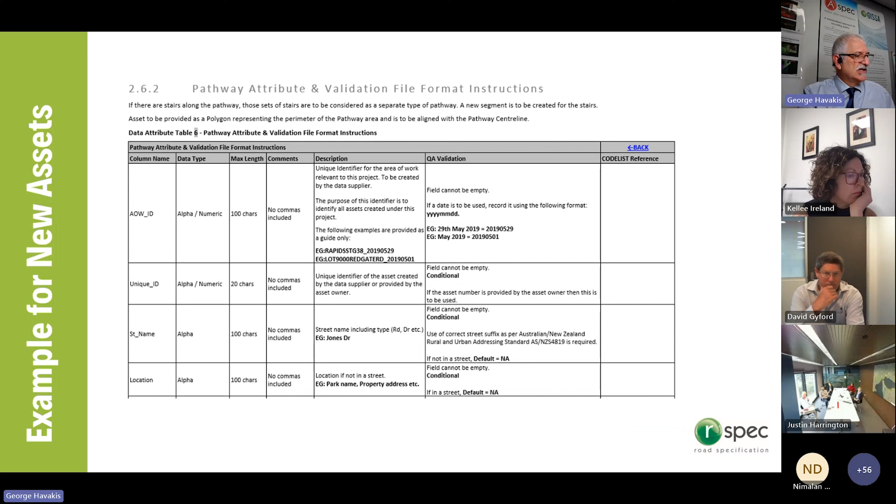Now they are identical except for one aspect, which I'll show you. If we look at the pathway table, you can see all of those attributes there, which you'll be familiar with if you've used R-Spec before. The only difference between this version for new assets and the version for existing assets is that we've looked at each asset attribute and categorized it according to whether it's a core requirement, an optional requirement, or a desired requirement, which is the YR. On this page, every attribute has a classification, and we use the optional and core requirements here just to give you an indication. It's really exactly the same - it's a mirror version.

What we've done is had a look at what is practical from a field perspective - what are the things you can literally physically see when you're out in the field. When it comes to a YR requirement, required and may need more research, what we're saying is that you may not find any further detail, which is okay, in which case you use a default value. But in the event that you want to rummage through your historical plans, or do some verification out in the field, we've identified which attributes would be classified as YR.

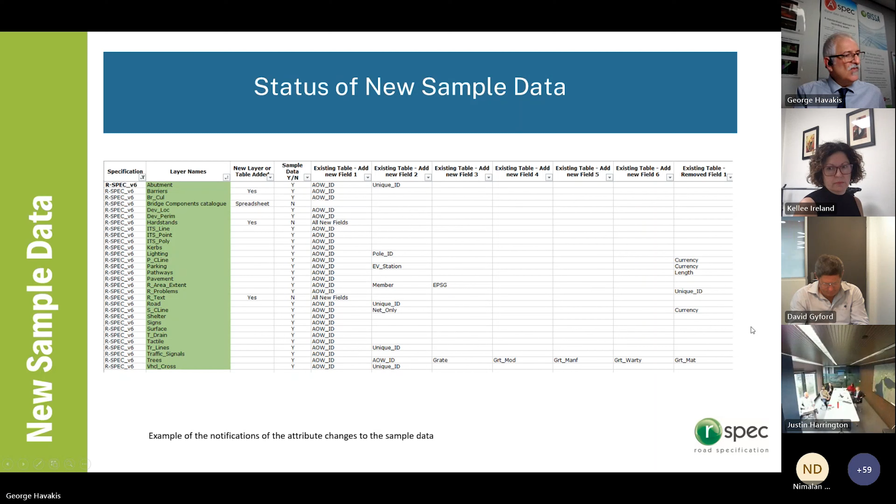Aside from that, we've looked at a couple of initiatives that are going around. One is VBIS, Virtual Building Information System, and the other is Uniclass. VBIS is a Victorian initiative that has been developed to assist the identification of assets from a built environment perspective for organizations that want to get their assets into their asset system. The intention of this is to standardize the coding of different kinds of assets.

How this fits in with R-Spec in particular, and A-SPEC overall, is that both VBIS and Uniclass are classification systems, and Uniclass is an ISO standard. Uniclass 2015 is ISO certified, a globally recognized standard, and it's also been recommended in the Victorian Digital Asset Strategy that for all the large builds occurring in Victoria, they utilize Uniclass as part of their classification system to create interoperability, which is fine.

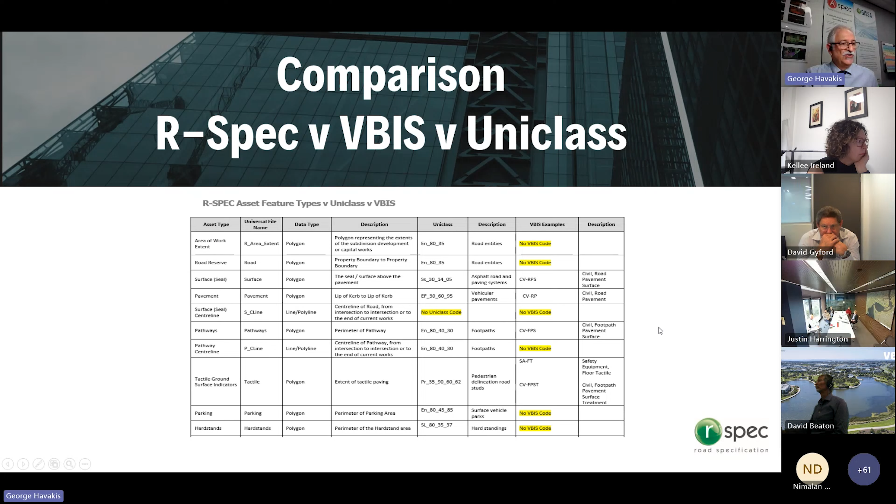Due to the level of maturity, and I'm talking about the increase in maturity and sophistication at the asset owner level, we're now getting a lot more queries around the specs, not just R-Spec but across the board, which is really pleasing because it gives us an opportunity to see how appropriate the specifications are. So this next group of slides is all about answering queries that came in from the community.

So I'll start with this one: which assets do I capture? I'll talk more about this under our governance section, but you may remember, if you've been at previous forums, that we've presented a checklist this year and also last year. So here's a snapshot of this.

What we suggest is that you start by looking at the checklist. When I say strong recommendation, if you really want to be clear about what is to be delivered and what you're going to receive, I can't stress strongly enough the importance of doing some kind of checklist. So we've prepared a checklist, and I'll give you more detail into this in the governance area.

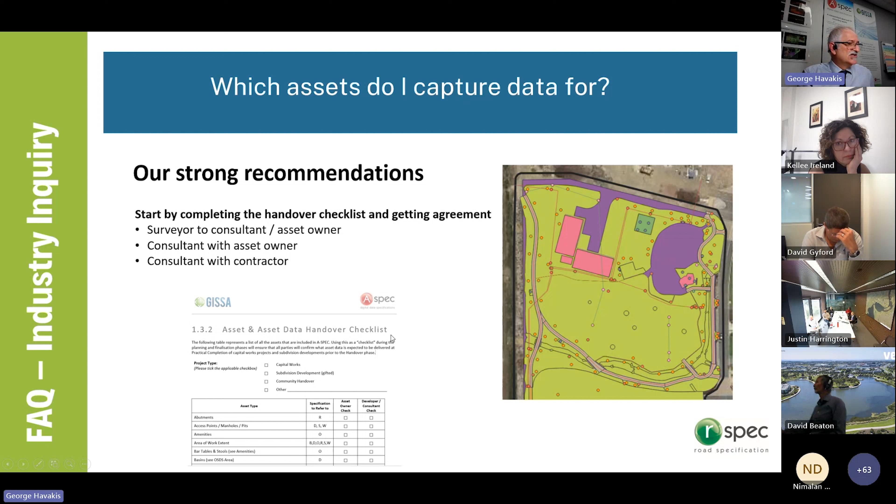I showed this last week, but this is really critical because of the impact of how R-Spec features will fit into an A-SPEC environment. I wanted to show this particularly for people who haven't attended any forums before, so I want to discuss with you the question.

The question is, we have a new feature in R-Spec called hard stand. So what is the difference between a hard stand and hard landscaping? Fairly valid point. Up until this version, we haven't had hard stand, so everything related to some sort of solid feature like this has been captured as hard landscaping.

Now, in this instance, in this park environment, I'm interested in seeing what people think. So Kellee has put in a poll - do you think it's a hard stand or hard landscaping? I'll let you do that in the background and I'll keep talking about that.

A hard stand has been created to enable capture of areas that are used to store plant and equipment or heavy vehicles. Fundamentally, the construction is different and the attributes are different, and I want to show you that. So in this scenario, the answer to this question is this is hard landscaping because of where it sits.

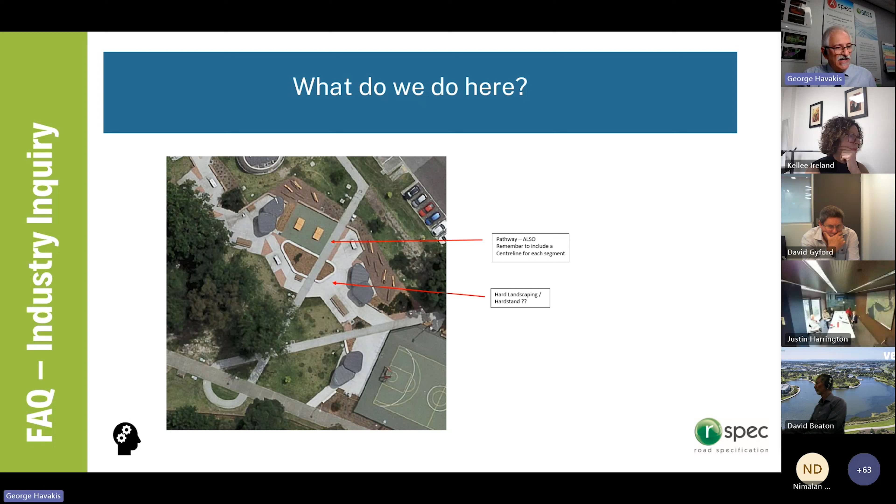However, if we move on to what is the difference between the attributes of hard landscaping and hard stand, if we have a look at these two tables, I've identified the common attributes in a pale blue grey colour, depending on the image on your screen. The colours will vary, but the highlighted ones are the common attributes.

As you can see, there's quite a few more attributes in the hard stand area that relate to the construction of the material of the hard stand, the weight bearing capacity of the hard stand, which is really important, whether it's been reinforced or not. Whereas in landscaping, there isn't that particular requirement, so there's far less attributes.

So if this was to be captured in the previous example as landscaping, you can see that you use this table on the right. If it was to be captured as hard stand, but you only captured it as landscaping, then you could see that there's a lot of features there that are really critical to the maintenance of that area that need to be captured.

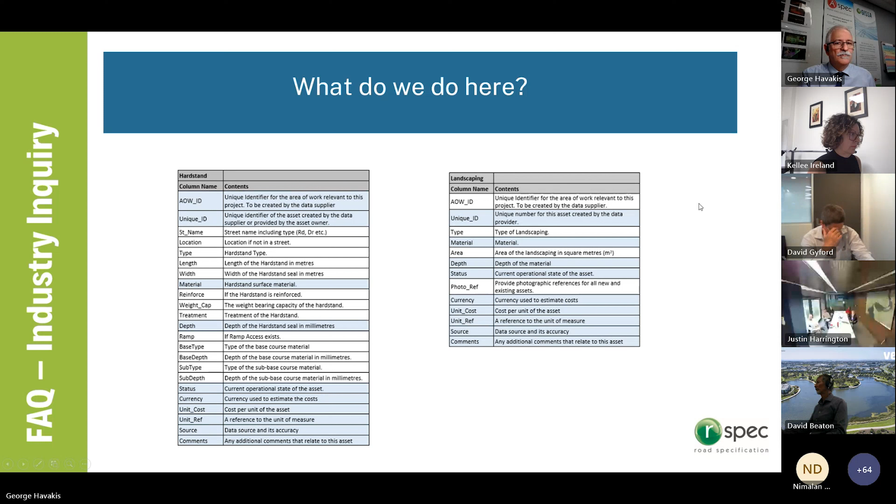Okay, so here's another example where we've been asked, so what do we do here? Do we do A or B? So the intention of pathways is that they are separated by segment for pram ramps or ramps.

Part of the reason behind this came about from an inquiry a few years ago by a councillor to their asset management area regarding the location of ramps, due to a customer complaint. They had a complaint where people found it difficult to access one side of the street to the other, and I think it was dealing with a person that had a particular mobility issue.

So the importance here is that if the council wants to aggregate the polygons, that's okay - that's a council choice. What we're saying is A is the preferred and recommended approach, so that's what's specified in R-Spec. And then if B is required or requested by council, then it's a conversation that you need to deal with.

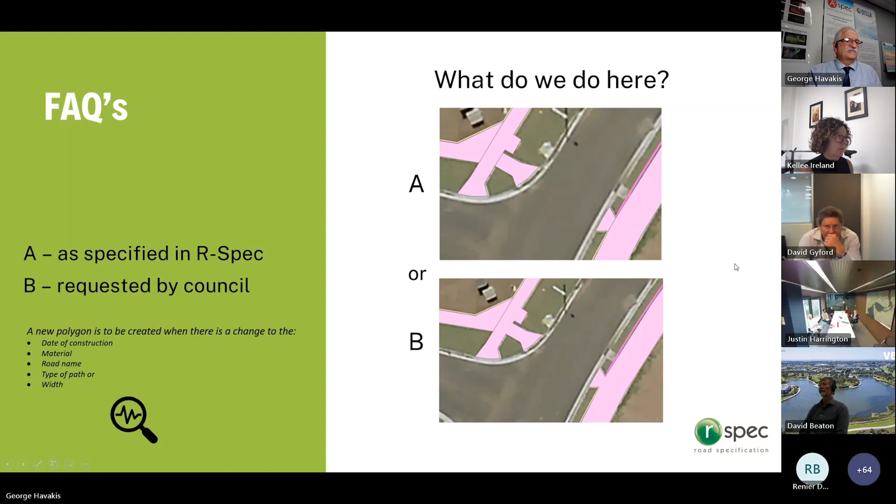So, in my experience, segmenting pathways are often linked to roads historically, so the roads have a parent-child relationship and generally viewed from a database perspective. So I hear two schools of thought: need to align to a road so we can find them, that's one school of thought. Another school of thought is, as long as it's recorded, we can find its location through the GIS. That's okay, we have no fixed view. What we've provided in the documents is some guidance around the segmentation.

So you can see again with these footpaths, these pathways, we've segmented out this ramp area, and then there are 1, 2, 3, 4 segments along here. Now, initially we did this to reflect where the ownership of these pathways are, but at the end of the day, it's something that we haven't standardized, because every organization wants their segmentation to reflect their asset management environment and their maintenance environment. So the main objective from an A-SPEC perspective is to get the data to the door, so that you can deal with the data the way that you need to deal with it within your own environment. That's the intention.

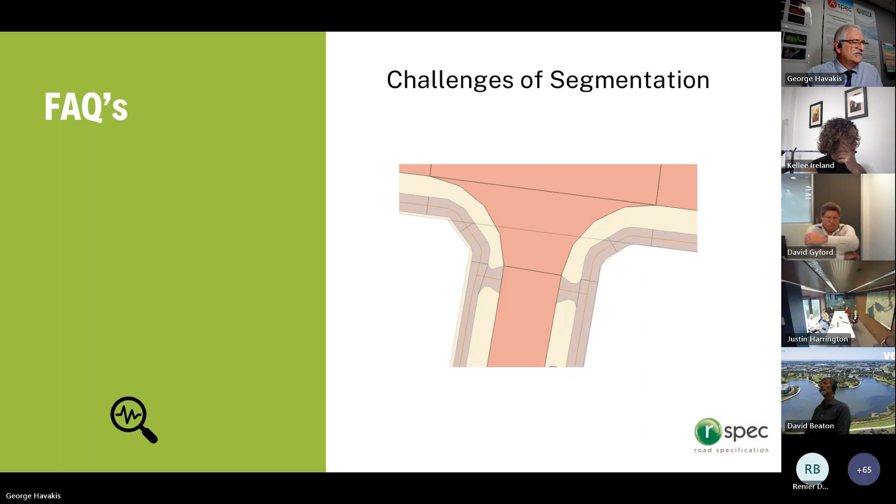There's also the question of how much you need to do - this applies to roads too. There's joint responsibility here, and I can see both sides of the fence. On one side, the asset owner saves time, and it's completely valid to have a requirement for segmentation to be done as they need it. As I've mentioned, I'm yet to see more than one council do segmentation the same way.

There's a level of consistency that's important. Ultimately it's up to the consultant whether they take on the request and whether they charge for it. Going back to John's question earlier about requests from councils, our position is that some post-processing can be done - no problem, as long as we're consistent with what the data is meant to deliver. That's the intention of the specs, and by following the specs, everybody knows what to expect.

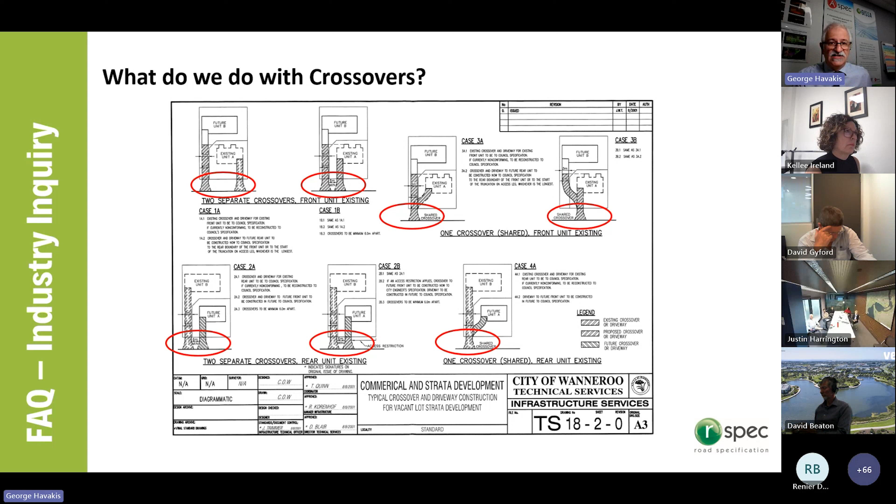So what we look at is: is this a council asset? Typically in my experience it's not, even though the council provides authority for how these driveways are built and maintained. So the focus, shown in the R-Spec example in the bottom diagram, is the pale blue driveways - separate from the road seal, which is a council asset.

In these instances, using the diagram we acquired from City of Wanneroo where we've identified the driveways, the extent of the polygon would stop between the back of the curb and the edge of the footpath, and typically there are no attributes associated with them.

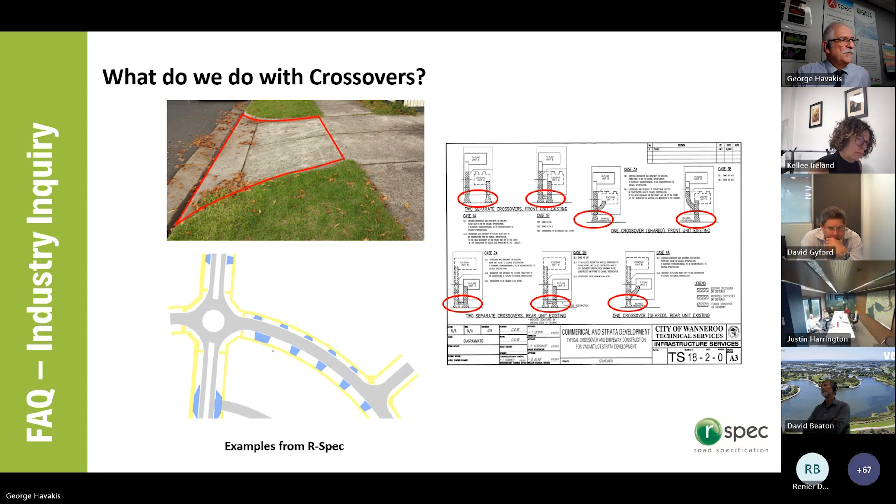We've been getting a lot of inquiries about the technical breakdown of assets, which I think is great because it shows the maturity level is increasing, and also the importance of the data for asset management decisions.

Now this one is around roundabouts and splitter islands. There are two questions here. Roundabouts have a requirement for diameter, so how do we capture it? In this instance, as the infill is landscaped, it would be recorded as landscape, and a landscape polygon would also be captured.

So the splitter island and pathway pavements - let me go back a step. The diameter captured should be the overall diameter of the roundabout. But because there are two kinds of assets there - the infill as well as the overall roundabout - both need to be captured. That's what's specified in R-Spec, if you look at figure 90 in the updated specification.

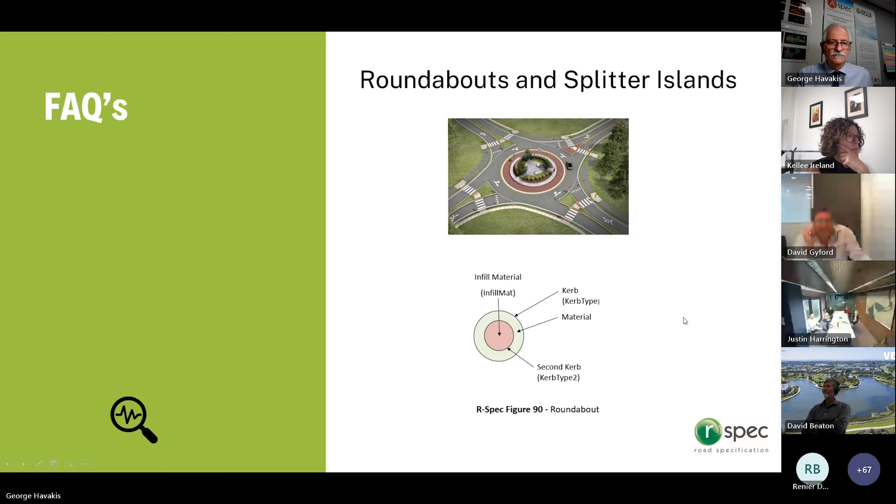And if we look at roundabouts and splitter islands - what do we do in this instance? We've got underlying pavement, we've got a pathway. There are also comments in the chat from John about council-requested concrete and exposed aggregate being shown as one polygon, and agreeing that there's a lot of variation between councils - that's difficult to predict and ultimately results in unhappy clients.

Happy to keep a style guide for each council, but I'd like councils to provide example data, ideally linked to their standard engineering drawings.

That's great feedback from both John and Jess, and I can see Shane is also discovering it - it's obviously a common thing going on. The first thing I would do is start a conversation. If your client is the council directly, start a conversation with them, particularly with the asset management area.

If you're a surveyor and your client is the consulting engineering company or developer, have them have that conversation, or have them authorize you to have it. It is difficult because there are so many variations. I'd love for us to have a standardized way of segmenting things, but we're not there yet.

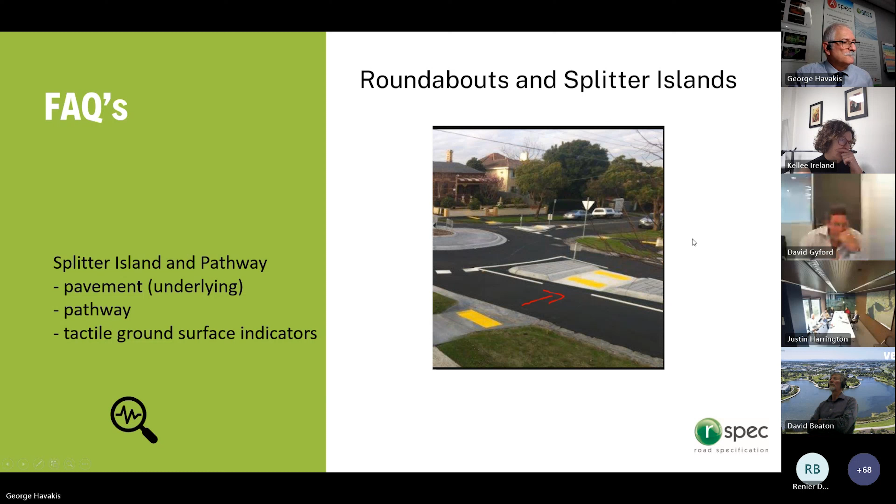Okay, just moving away from diagrams for a moment - conditional fields. There are conditional fields throughout R-Spec and throughout all of the documents, and these are becoming more common. Essentially, it's an if statement: if this situation exists, then do this.

As you can see with the unique ID, if the asset number is provided by the asset owner, then this is to be used. In some instances, it will lead to a default value, such as these two fields, street name and location, and they are connected. So it's either one or the other - that's what the condition is. If not in a street, then use the default. If in a street, then use the default for location.

So it's important when populating this level of detail that it's not something that needs to be verified out in the field, but it can be done back in the office as you're processing your data. So the conditional statement is quite common.

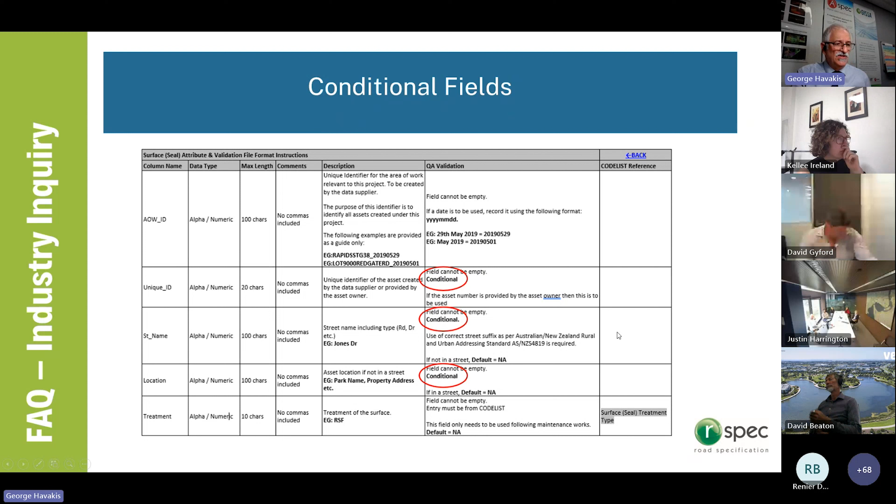So there's two - this is the last frequently asked question. Sorry, there's two last frequently asked questions. This is the first one: I've not been provided with some details - what do I do? Do I make assumptions, just use my defaults, or leave blank and hope it's not noticed? Well, the actual answer to that is none of the above.

It's important, and we stipulate this whenever we're talking to consultants, that you chase up with the lead consultant and request they provide the details. And I know it's easier said than done. However, the alternative is to provide defaults, knowing that the consultant, knowing that the council or asset owner reviewing it will say, well, hang on, you can't put the defaults in there, or you can't leave it blank because it's a brand new asset - so everything about that asset is known. So it will be incumbent upon whoever's doing this data collation to chase up with the lead consultant or the contractor to get the information they need.

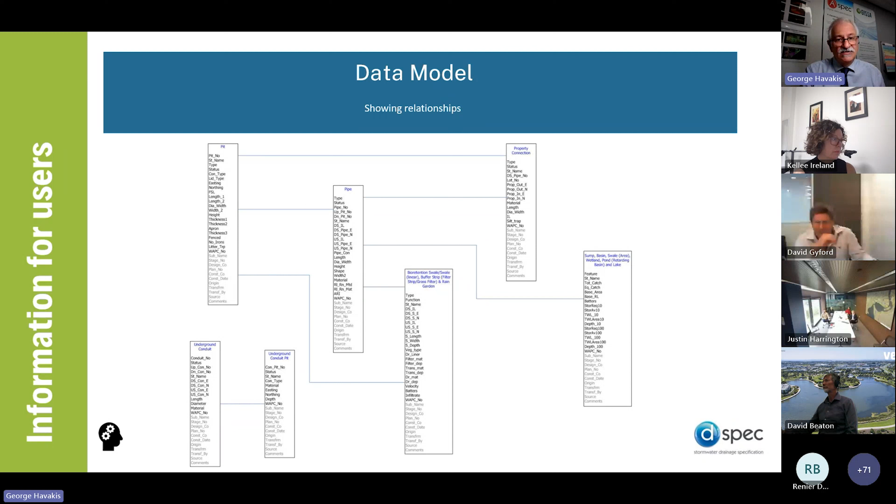Now, governance. How do I record a C comment? From the data provider end, the C comment enables the data provider to submit their tables when features don't currently exist. No problem, that enables them to get through that validation area. When received by an asset owner, we request that we are contacted so that we know of any new features that are emerging that we need to create new codes or new features for.

So we're not suggesting you use C comment, not at all. What we're suggesting is that the C comment identifies that there's something outside of the current code lists or outside of the features that are captured. And as soon as we're notified, then we can deal with it.

So the asset and asset data handover checklist, I talked about this earlier. This is available on the A-Spec website, and you can access this. I don't think I put any login requirements for this, so you can log in and download it there. But the importance of this is that there's a part to sign off on from both parties, so that way it gives you something to deal with, and something around certainty around what you're going to receive.

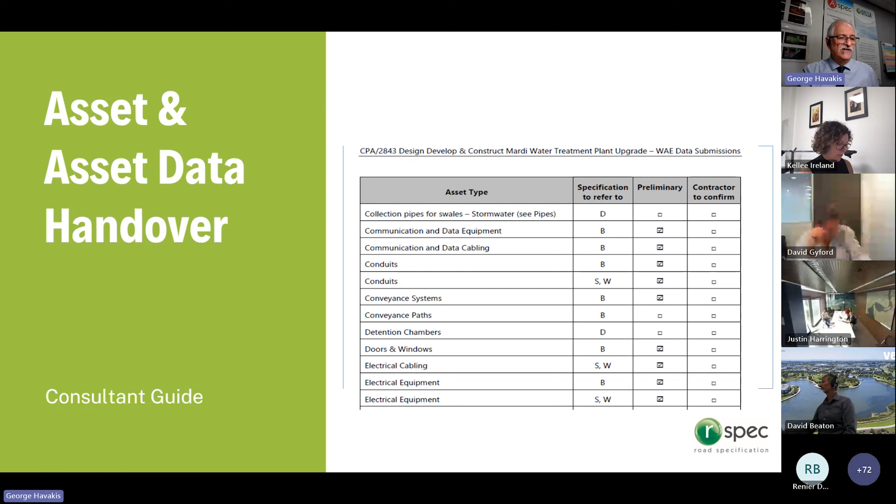The quality report is really important. Essentially we're looking at creating confidence and certainty and removing the time and effort to verify what's changed. This is built into the specs, as are the asset recording principles, about recording the detail, recording the assets based on a particular precision. Each asset type in each spec has a horizontal precision code and a vertical precision code, and these are guides to say here's what is expected to be delivered, here's what's expected to be done to capture the data that is to be delivered to the asset owner.

The certification form's been modified. I'm only bringing this up because we've included a start date of observation and end date of observation. And for the experts in this meeting, they'll know that this relates to the Australian Terrestrial Reference Frame that needs a start date and end date to determine what the variation will be.

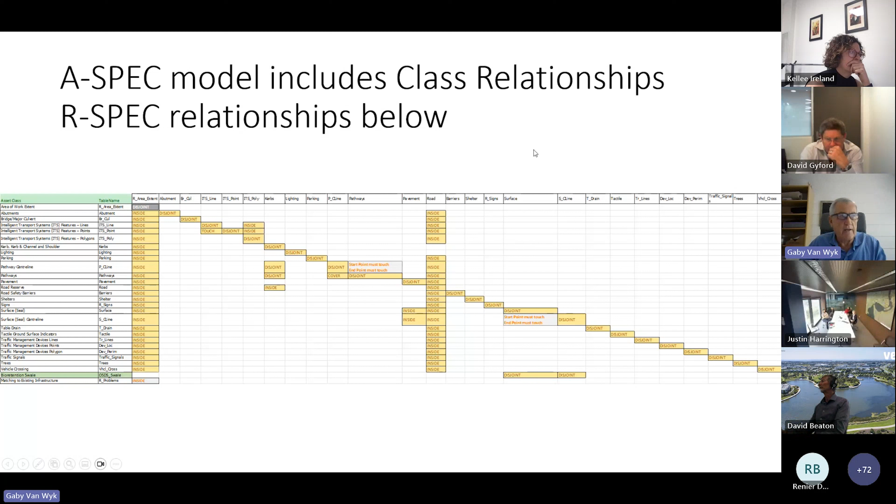These relationships that I've got here are the spatial relationships between different components or classes within R-Spec. I'm not going to go into the details of those, but what I want to talk about today is some ideas of how you test for those, because each of these should be tested, and both council and consultants should consider adding tests for each of these relationships within their process.

One of the first ones I'd like to draw your attention to is attribute relationships. There are two types of attribute relationships, and these are all embedded in the documents, and the relationships George was talking about earlier will highlight these sorts of things. One type is a one-to-many relationship, and the other is a one-to-one relationship.

What I'm sharing here today is just one of the ways. There are different ways, but this is one of the ways in which you can test using SQL in a product like QGIS, using SQL to test for those kinds of relationships.

The two that I'm going to be talking about: a surface's unique ID has to be captured in the parking seal ID, and that's a one-to-many relationship. But then the pathway unique ID and the pathway centerline path ID, that's a one-to-one relationship. And the same with the surface and the surface centerline.

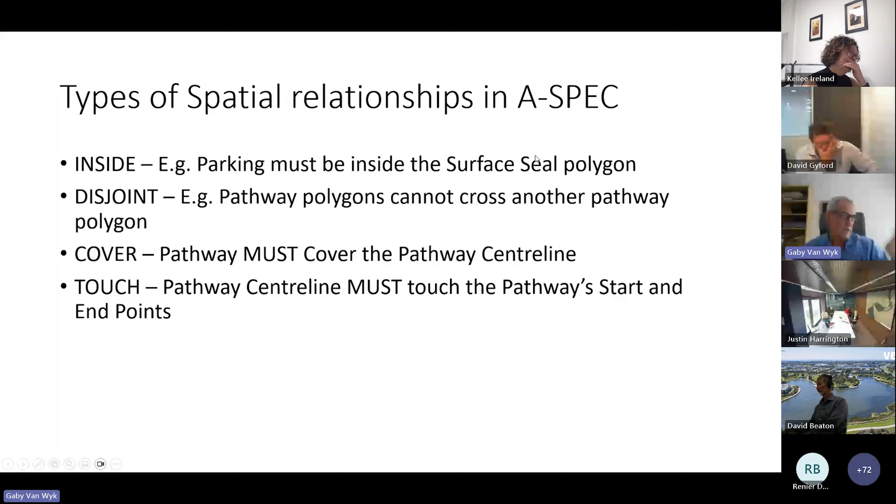So what I'm going to do today is play a little screen capture video for each of these and talk through that. The first example is to find all the records where the seal ID is not the same as the unique ID of the surface seal within which it is located. I've written out the SQL statement over here.

You can go and look at the recording, and if you take that as a principle and apply it, you'll easily be able to apply it to some other relationships like that. So here, playing my little video, and you're just going to zoom to the surface now.

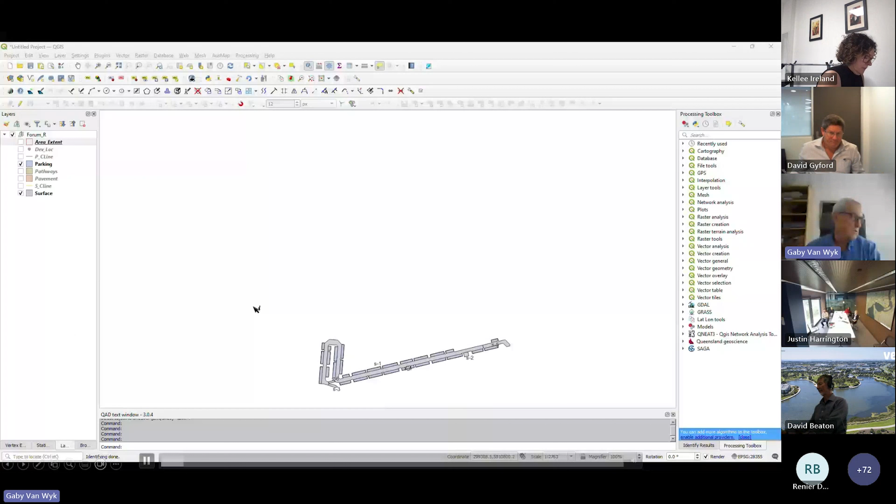So this is an example. I've got parking and I've got surfaces, and I want to look at the relationship between the two. What I have to start off with is just make sure, and this is just something that I always say, that I work in a geo package, and that I always know which geo package I work in.

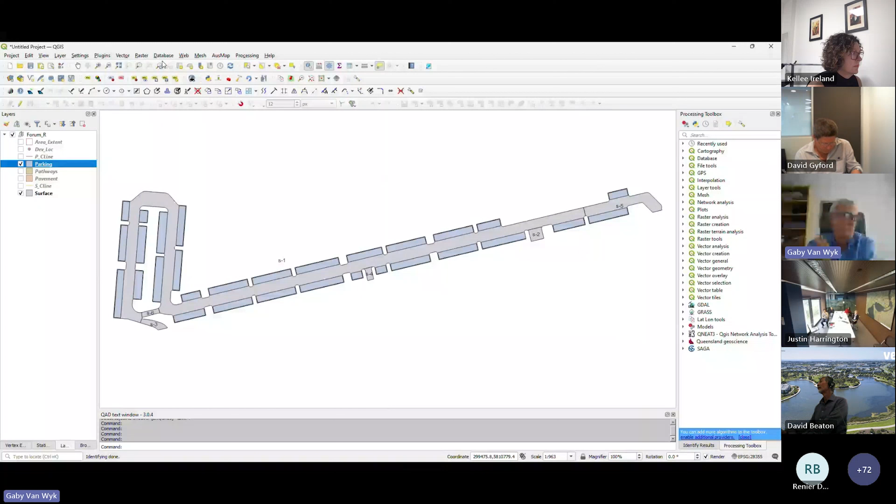Then I go into the database manager and open that geo package, making sure again that it's the same one, not something different. And then go and open the SQL window within that.

Now I've stored the SQL statement that I want us to work with, so I've just loaded that and executed it. And there it is—it's telling me that there's only one record, one of those records where it's not the same.

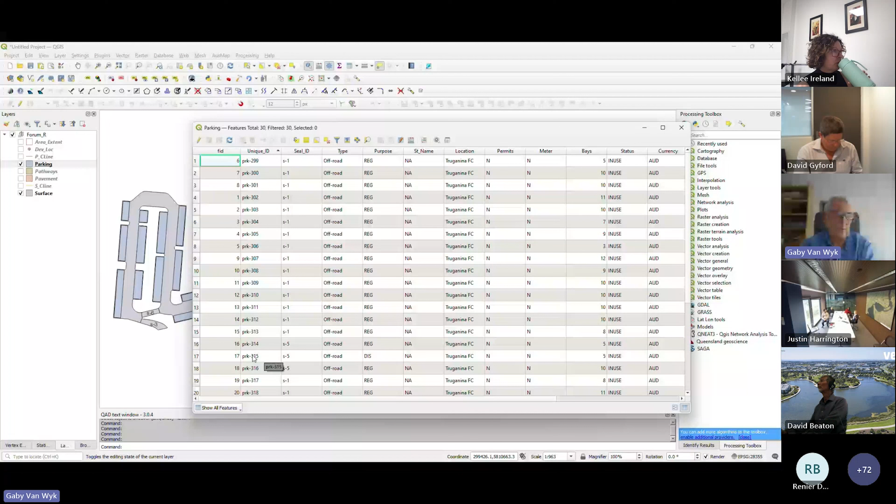So I can now go and find that record. Again, there's different ways in which you can find it. I'll just sort by the seal ID, or the unique ID I mean. I've looked at what that record is, the number, zoomed to it, and the system zooms to the record. If I query the seal, I see the seal ID is S1, and if I query that parking area, then I'll see that's actually captured as S5.

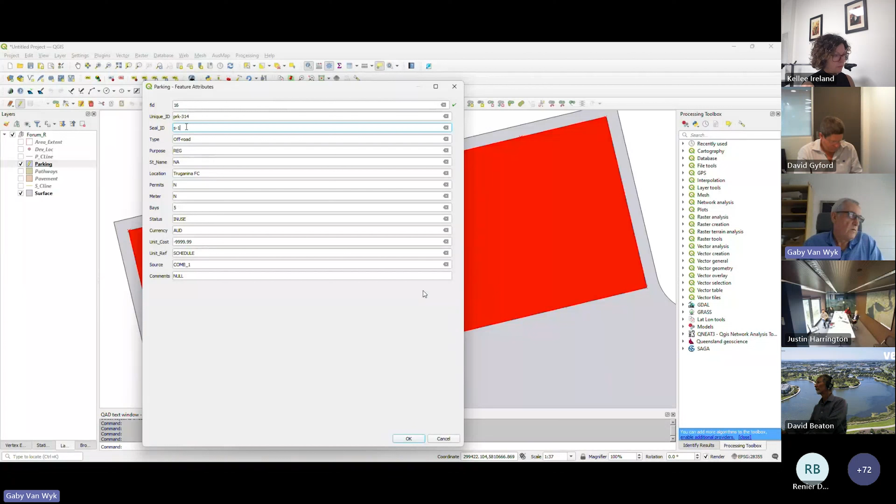And I can go and clean that up, fix it up—my video is too slow—save it and go back. I'll just advance a little bit.

So what I'm doing now is just rerunning the same test and seeing how I go. And this time I'm getting no results, which means that I've solved the problem. I'll just stop right there and draw your attention.

What I've done there is just remove that—in SQL, you have exclamation mark equals, which means not equal to. So I've just removed that exclamation mark and I'm going to run it again, and now I should get all the records. What I sometimes do is a count to make sure I've covered everything, and that there's no problems any further.

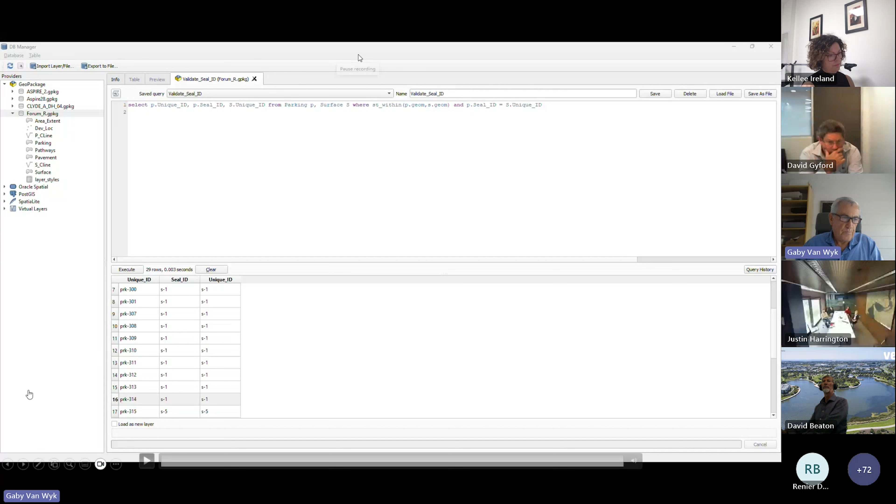And I think that's it for this slide. I'll move on to the next one.

In the next one, I want to find all the records where the seal ID is not the same as the unique ID of the surface seal within which it is located. The first one I talked about parkings and seals. This time I'm talking about the seal ID and the surface seal centerline.

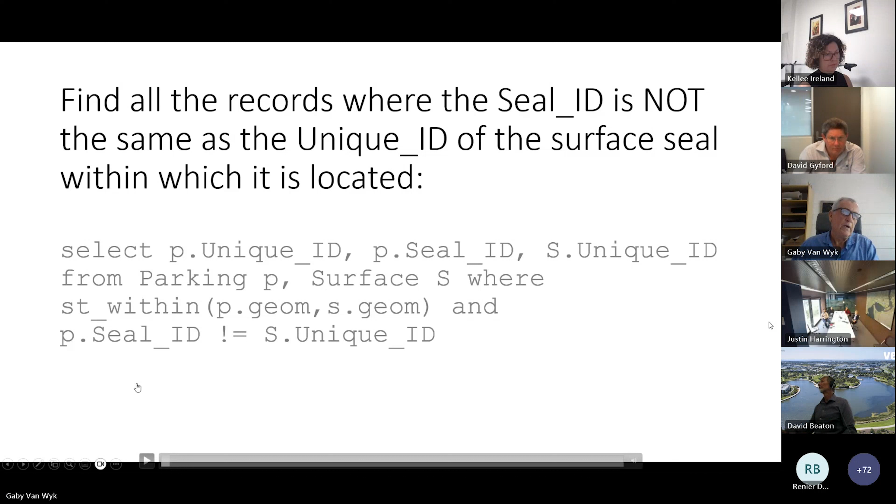Okay, let that run. Same sort of data set, and this time I'm just going to be working with different data. Sorry, I am still talking about the parking.

Am I playing the same video? Apologies, I am. How do I get to the next one? Just going to make sure I've got the right one.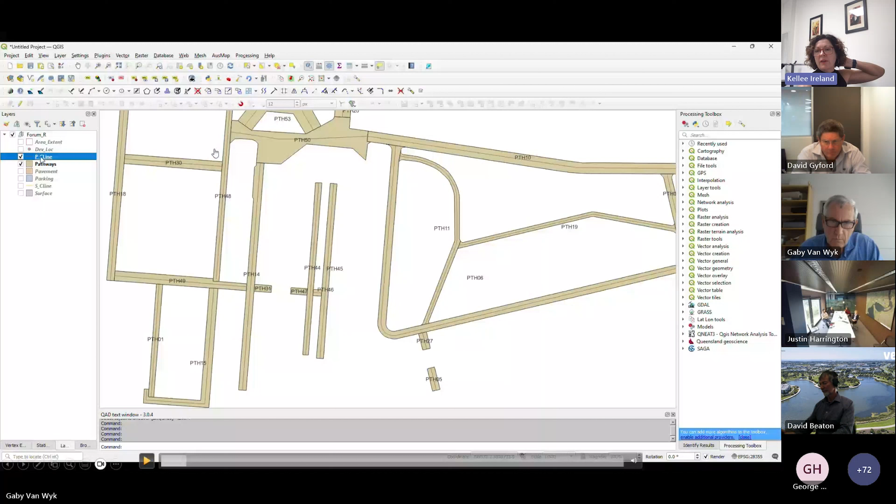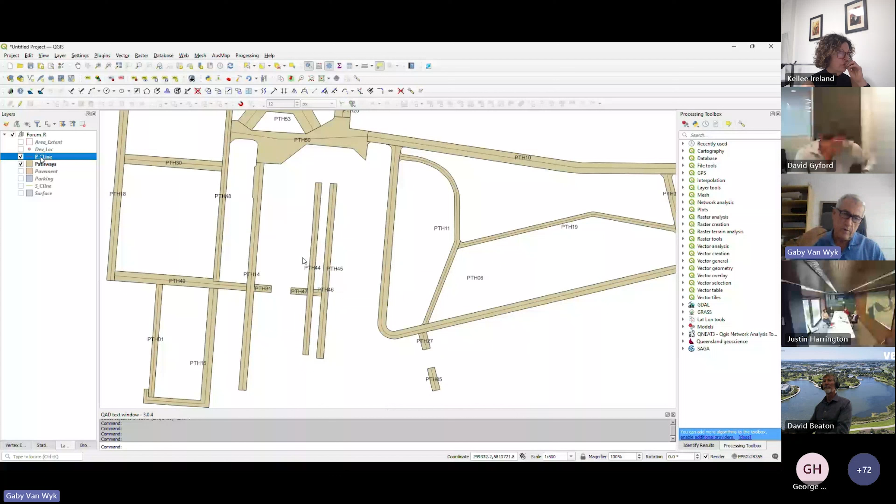In the pathway, the pathway ID or the unique ID of the pathway has to relate, according to the spec, to the surface center line path ID. So it's not the unique ID of the path, but the path ID which has to relate. It's got to be the same because it tells me that - that's the one-to-one relationship between the pathway and the pathway center line. So the pathway has a unique ID called the unique ID, but it has another field called path ID, and that path ID has to be the same as the pathway unique ID. So I hope I answered that question.

Okay, just running that little video again, having a look at the attributes. So there's the unique ID, that's the path ID, that's the stuff that I want to query.

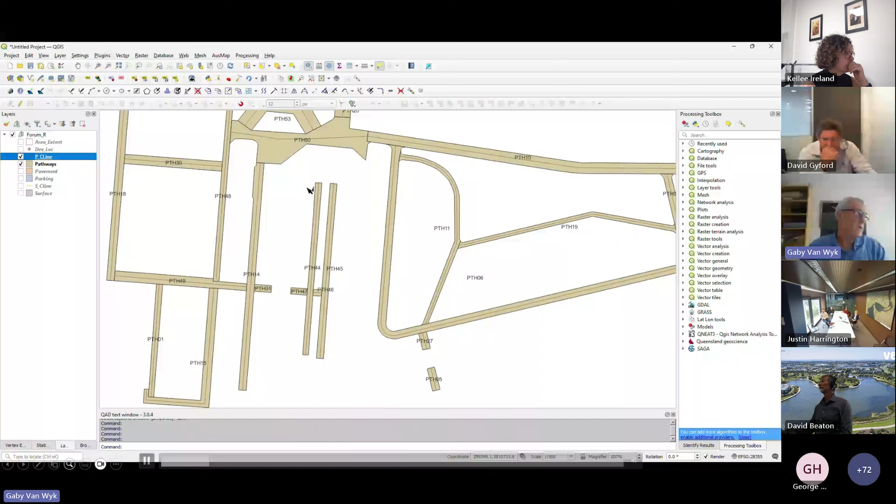So I go back to the database manager, again make sure that I'm using the correct data, and I'll just quickly load the pre-created SQL statements. I'll run that first one, and there's the results.

What this tells me is just a count. Let me pause and explain. What I'm doing here is counting the number of path IDs - how many times does a particular path ID occur? Because it should only occur once. If you look at record number 44, I find there's 2.

The second part of this query is just making it easier - I'm extracting, using a method that will help you extract just the one record that fails that little test. If you run it, you'll find there it is, it's the number. So for path 46, there's a count of 2, and I'm expecting to only have 1.

So now I can go back and find the record and fix it. It's going to load the attributes and look for that particular record, sort the path IDs. I could have searched for it, but I just thought it would be easier in here to show you.

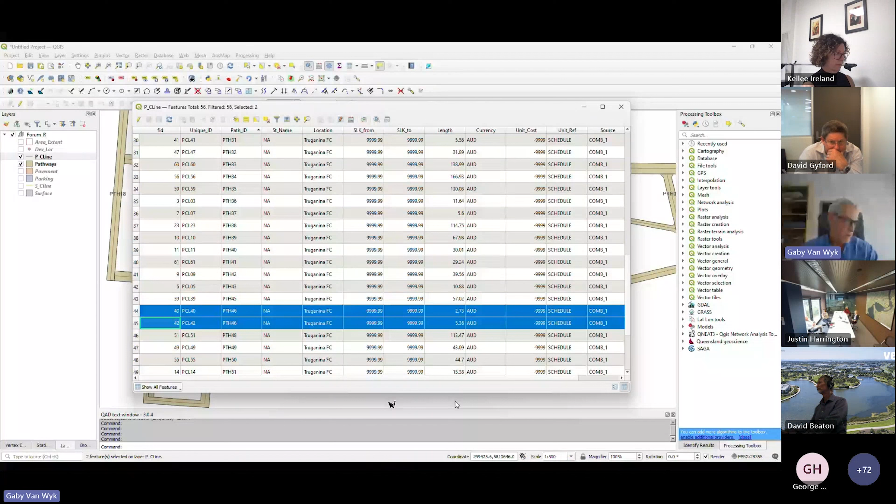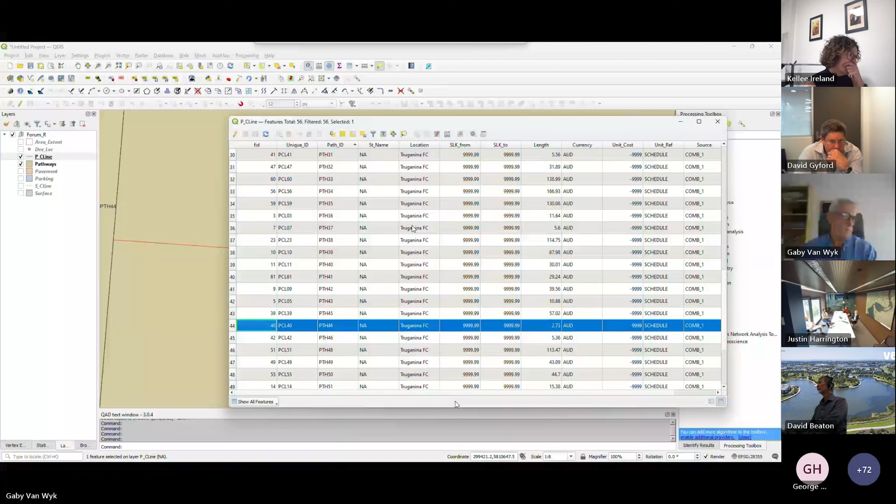There you can see rows 44 and 45 have got the same path ID. So let's zoom to those - that's the first one, and zoom to the next one. You can see that they're both next to each other. So when we captured this data...

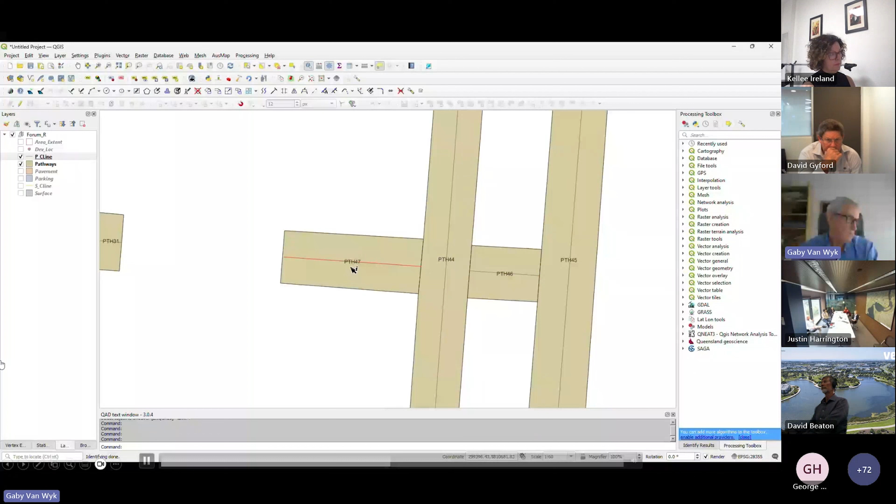The person that captured the data must have made a mistake. So if I query each of those - that one is, oh, by the way, I'll just pause here for a minute. The text that you see on the screen here, that text is actually just the ID of the pathway.

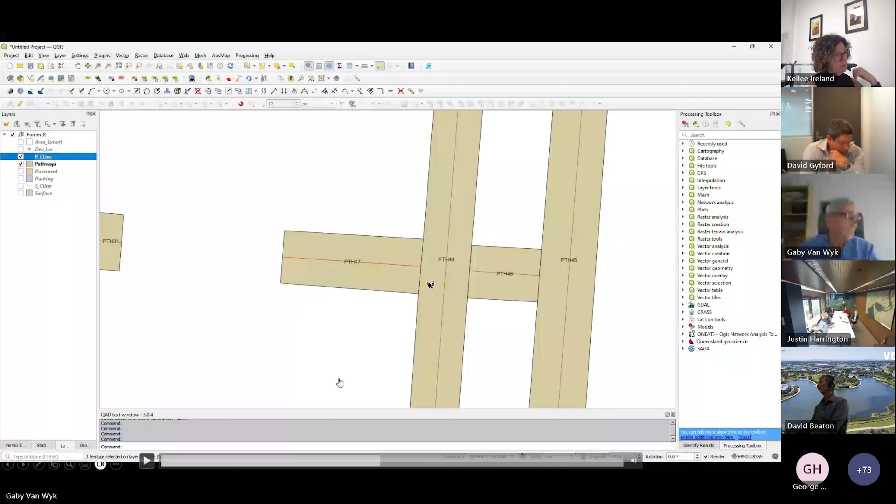So for pathway 47, each of those center lines should read the same as the text that's being displayed. So I'll just look at that one again - that one is right. Query the number 47, and that's pathway 46. So we know that that's incorrect, and that's what we need to go and fix.

So you don't need to talk about that.

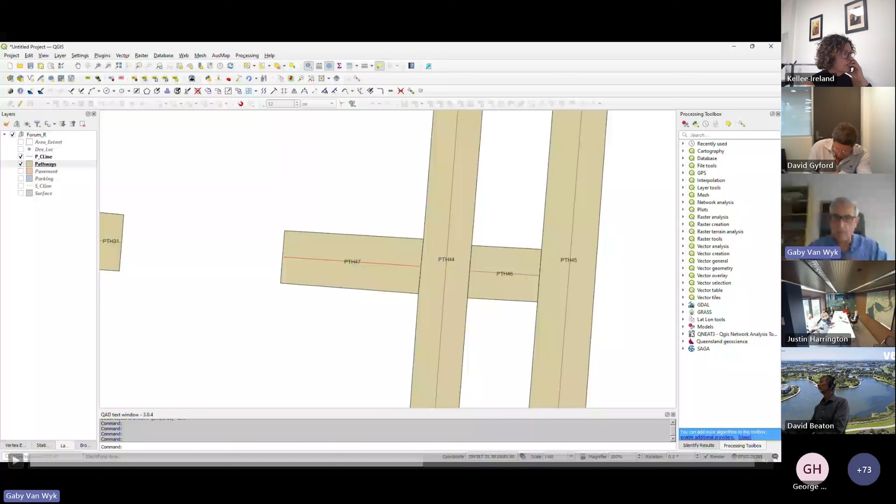So that's the first part of that test, and I did all of that using SQL, extracted and understood first how those different data sets have to relate to one another, and then found a method to automate that test. The automation is probably the key, because I can write that script once and then run it again every time I have another data set like that.

Looking at the second part, let's skip a little bit forward. The second part has to do with whether all of the records have actually got a center line. So what I want to do is see whether there are any path IDs that are missing.

So again, going to the SQL, and now look at that second statement. Sorry, I'm playing the wrong video again. How I'm doing that, but... come on.

Sorry, what I'd like to show on this particular one is, just zooming back, is a scenario where for every seal, if I don't have the seal ID associated with the parking polygon, is there a way in which I can automatically add that parking seal?

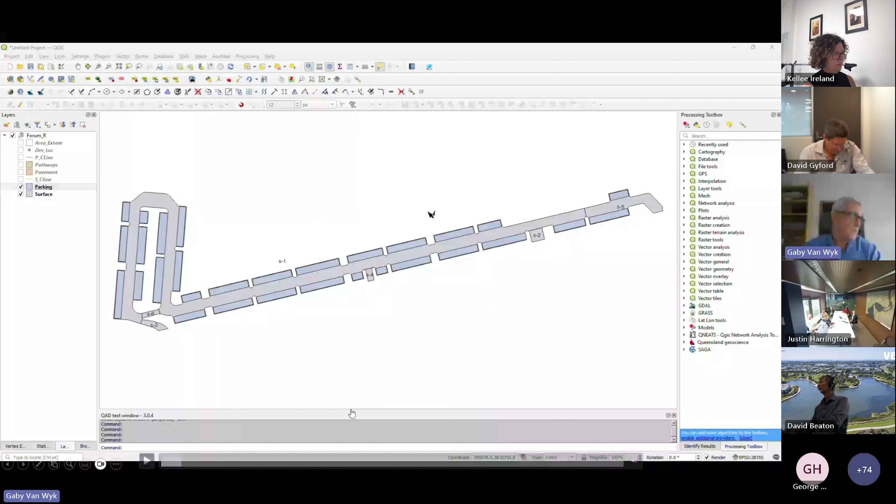There's a tool, the join attributes by location, and what I do in that tool is use parking as the class I want to join stuff to. I'll skip a little bit forward, play a little bit, just get to the right one, and then switch it to the surface. So I want to take items from parking and update those with something from surface where I specify that the relationship is a within relationship.

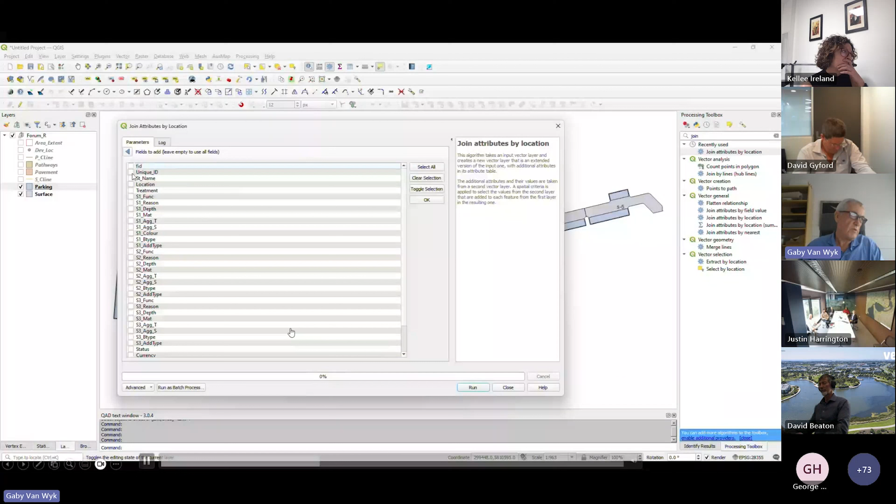So where they're within, then I want to specify a particular ID. I've taken the unique identifier and I'm just adding a prefix so I know exactly what I'm talking about.

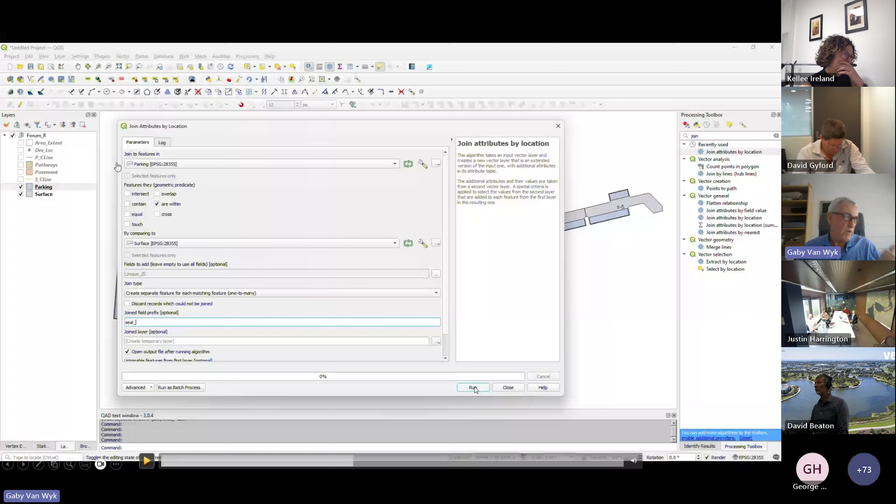I'll just pause that before it runs, and explain that again. So I'm taking the parking, I'm looking at where they are, within which surface polygons each of the parking polygons falls. And then I'm going to add the unique ID to that parking. All right, and that's what I can do with that little tool.

Excuse me, Gaby. Yep. Is the pathway lines, intersect, or does it stop at the end of each polygon?

That will be answered in a little while, so it's a good question. Just going to pause there quickly. So I run the thing.

So what you see here is the joined layer, but it's all the parking areas. But within each parking, I can see where the seal ID is, or I can see that seal ID that it is within. And then I can use my calculator, and I can just go and say update an existing field, update the seal ID using the path of the unique ID that comes from the seal underscore unique ID.

All right, and that'll update it. So coming to that question that was asked just now, I'll jump a little bit forward because this is getting to the bottom. It also tells you, you can see that I've got some blanks here, so some of them were not updated, and I might go and look why did that happen, why was it not updated?

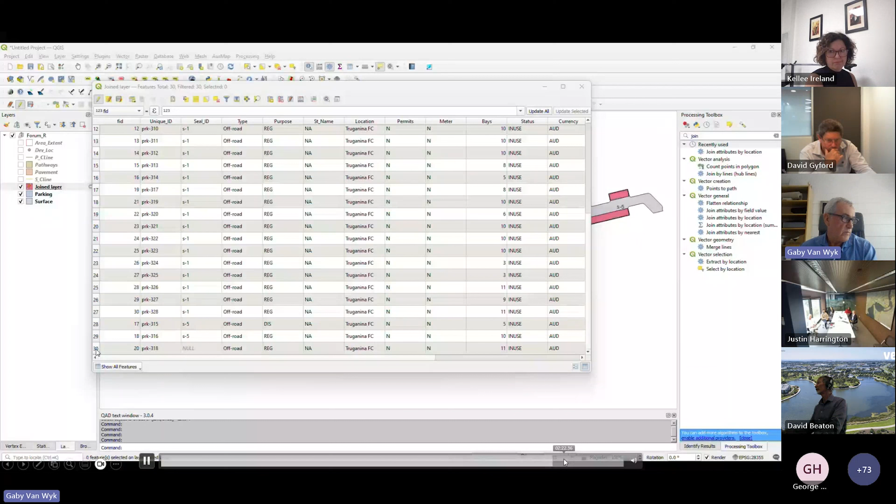Jump a little bit forward. So I'll go and zoom to that one, find it, zoom to it, and you can see that what happened is that particular parking polygon was not completely within the seal, so it overlapped. It was a mistake within the data, and I'm going to show you that.

You know how to do that, you can fix that data, and then leave it at that. So that's just updating, doing a spatial update, making sure that those identifiers are okay.

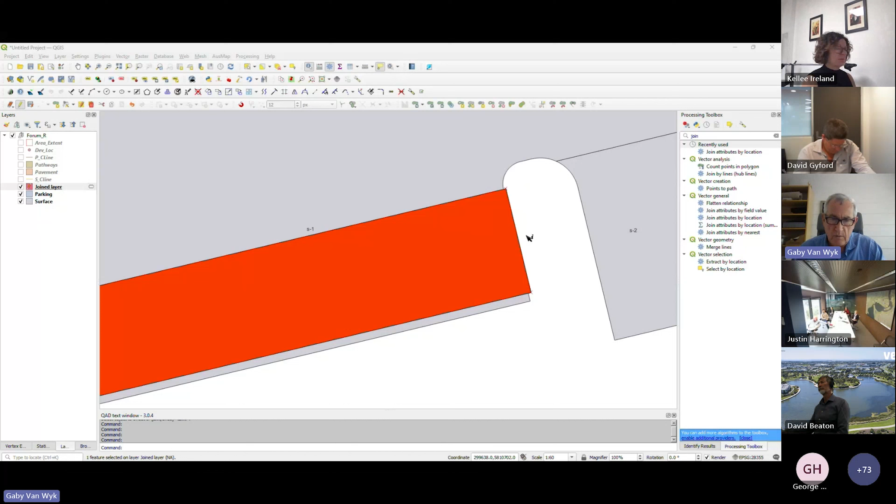Now, Kellee, before I jump on to the next one, how much time have I got? 2 minutes. Okay, all right.

The last one is just finding relational errors. I'll just talk you through those. So sometimes there are topological issues that occur within our data.

Topological issues are just overlaps, where two things have a relationship with one another that they shouldn't have. There is a topological checker in QGIS.

I'll just zoom back a little bit so you can see what the icon looks like. I don't know, where's that icon? In my video... see, now I'm trying to do it with the videos. There you go, there's the topology checker.

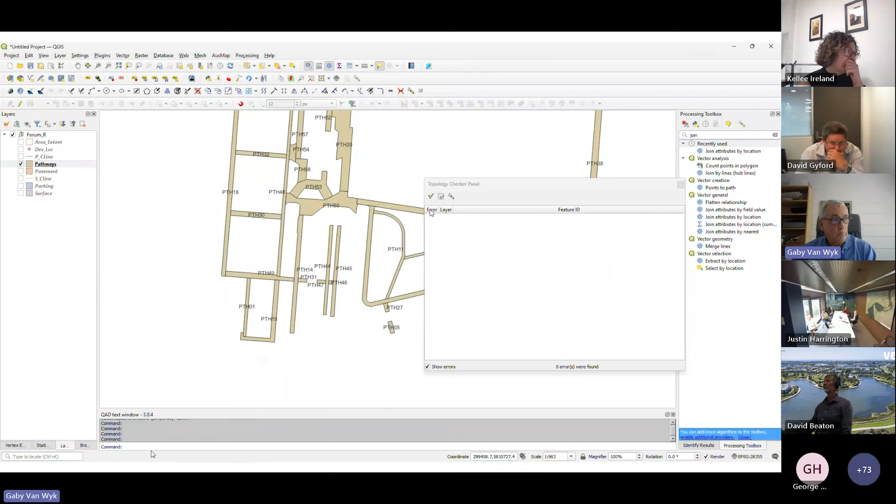First of all, you've got to go and set up your rules for that topology. Basically what I'm doing here is saying pathways should not overlap, and I add that, so one pathway shouldn't overlap another pathway. But I also don't want the pathways to overlap with surfaces.

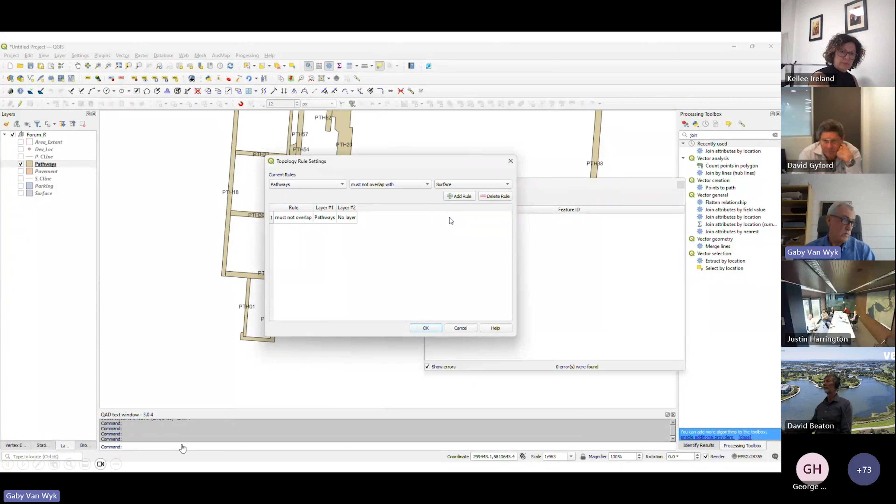I'll just pause the video and jump to the result, because if you then run it, it'll do these sorts of things. And I can see there's an overlap over here. There's another overlap there. There's also something going on here.

I know what it is, there's a duplicate vertex at that point. But the interesting thing is that it gives you all these errors. So it tells me there's overlap over overlap, and there's an intersecting geometry - that one intersects itself, which is in itself a problem. I'll stop there, I hope that was of insight.

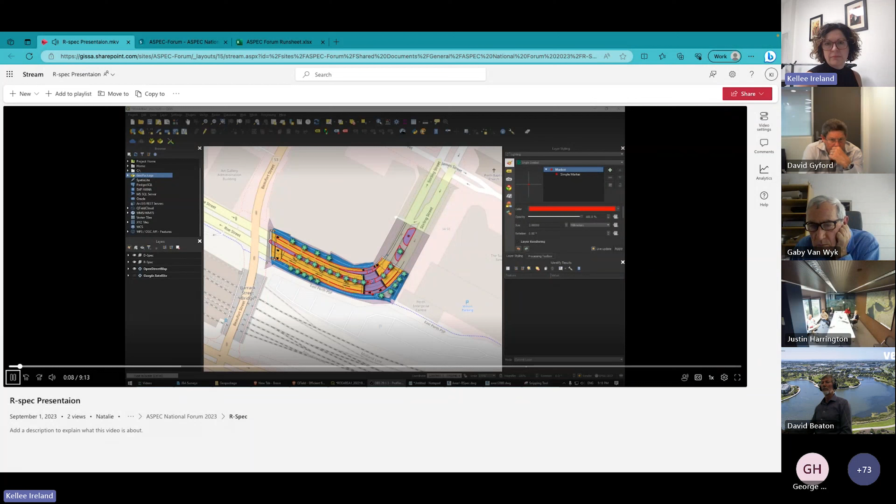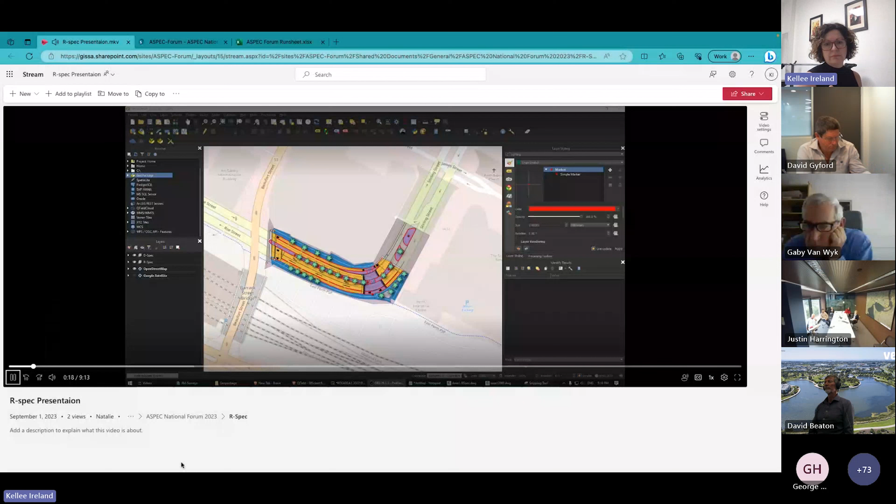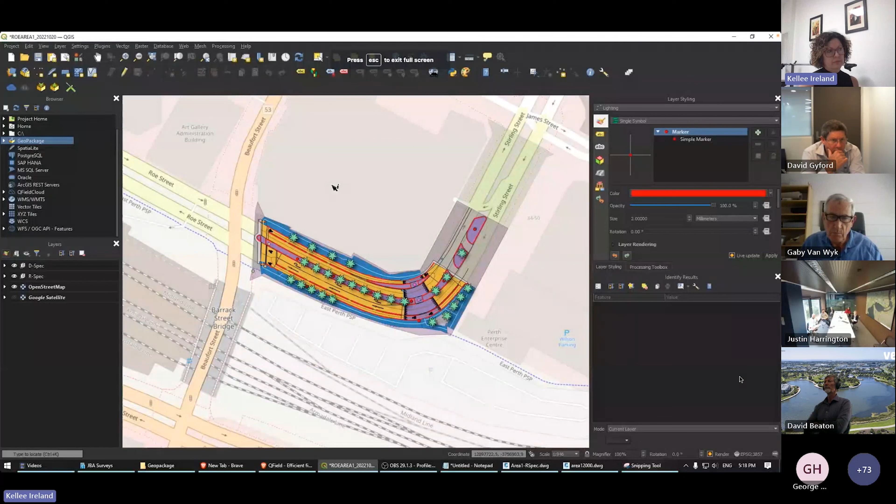I was told to do some PowerPoint slides, but I think it's much more apt if you see what I'm actually doing. Okay, so this is a job, an R-Spec job we have in City of Perth for Roe Street. And I'm using QGIS because it's free, has a lot of functionality that I find very handy, useful, good for data integrity.

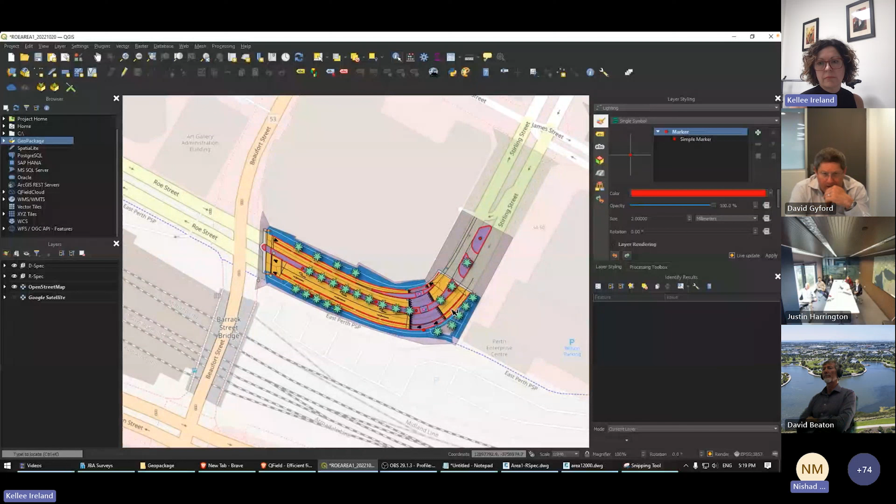At the end, I'll mention something else I'm looking at related to QGIS to hopefully make it even faster and cut out a lot of steps that you'll see. To start a job like this, I would get the surveyor to go out, pick up all the geometry for me, take photos if necessary for the layer, and also help me identify a primary key if it's required.

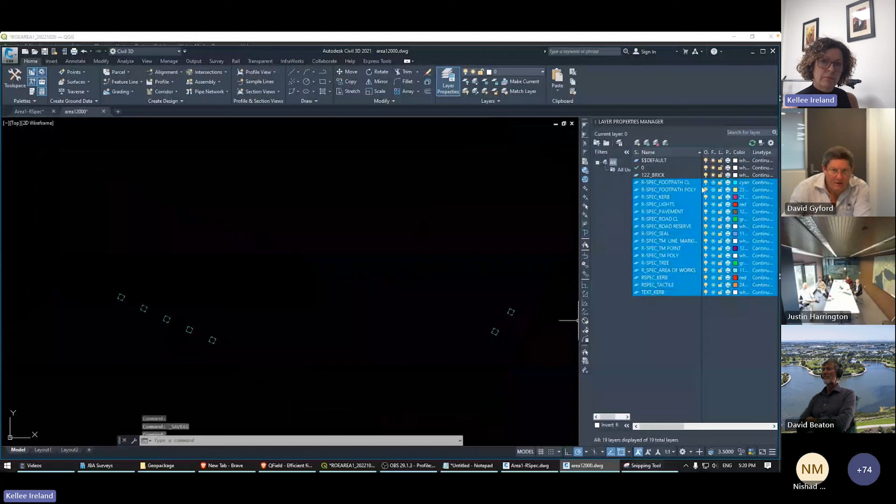So they'll number the kerbs for me so that I can link the photos easily. For example, once our surveyor's got everything that we want, they'll get the geometry correct for me - there's only lines, points, and polygons. So I'll make sure we get a drawing file that looks something like this. We bring this in from our survey package and make sure these shapes, lines and points, are all compliant and make sense. Got our kerbs, just turn a few on and off.

And we get everything in this drawing file ready to go, because this is what I want to import into QGIS and attach the A-SPEC attribute data, R-SPEC in this situation. So this is all the shapes that we got after our surveyor's done everything. It's also given me the photos in a separate file. What I do then is I'm using geo packages within QGIS.

This is my way of keeping the templates of A-SPEC as stringent as possible. I've set these up to have default values, and I try to make sure they're always up to date as well. When I start a new job, I'll be copying this geo package template into the job, calling it something else to make sure I'm not messing with my template.

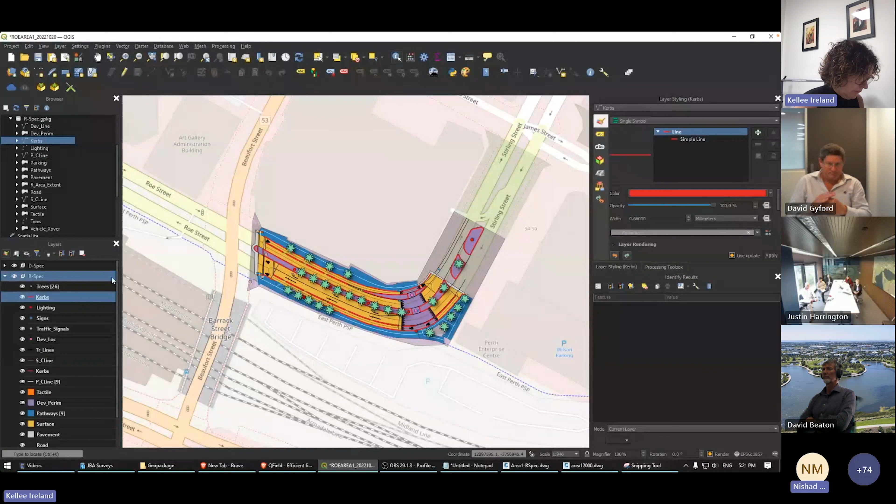So each one of these will have defaults and also, for example, combo boxes and things filled out automatically. This is so that it just makes it as easy as possible when filling it out, and we're not going to put in anything that's incorrect - it's for data integrity. So these are all from the specs, and if I get these right once, it should be it.

We have 1Spatial also doing GDV hub, I think I'll mention that now. That helps check R-Spec data at the moment for inconsistencies. This is going to be great for me to run through templates, so I'll be able to figure out where there's errors, update my templates, and hopefully have no errors ever again. That's my goal.

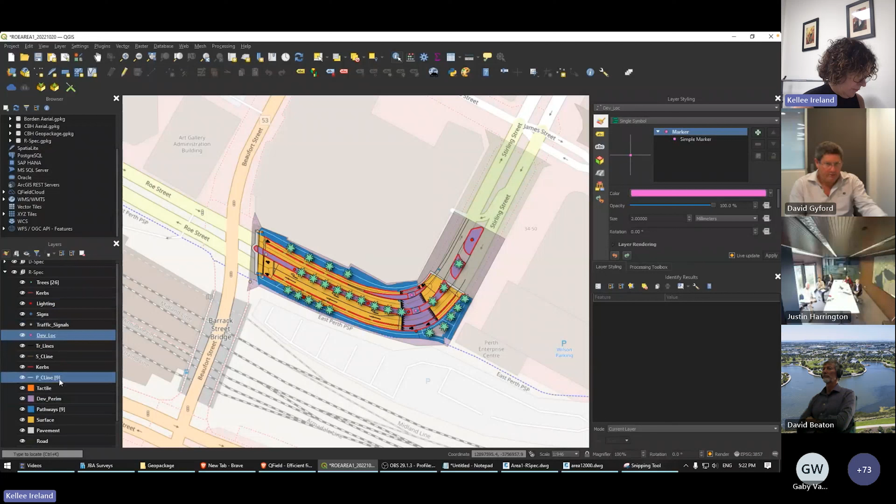So once I get these layers in for the job, they'll be in here. They'll have a style, they'll have a few other things like the defaults I said before, and all their attributes lined up, ready to go. But there'll be nothing in there, obviously. And this is where I'd have to bring in this drawing file that the surveyor's made for me.

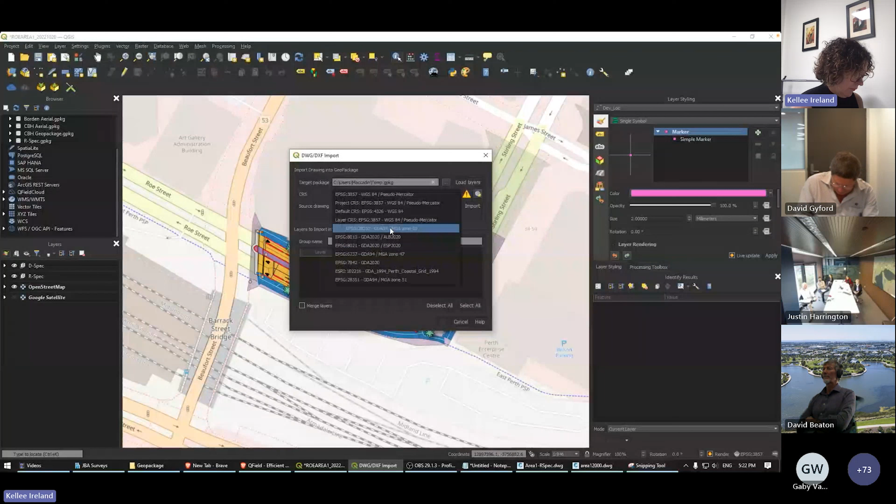I do that in QGIS here, just under import DWG. Target package doesn't matter, I just choose temp. MGA zone 50, using for this job. And I'm going to import, just on my second screen, the drawing file.

Some of these layers aren't required. Ideally I'd have these labeled what they're supposed to be in the R-Spec as well, but it doesn't really matter because temporarily this is what we need. Call it DWG. Now I've imported that drawing file. This drawing file's job is just to have the geometry for me.

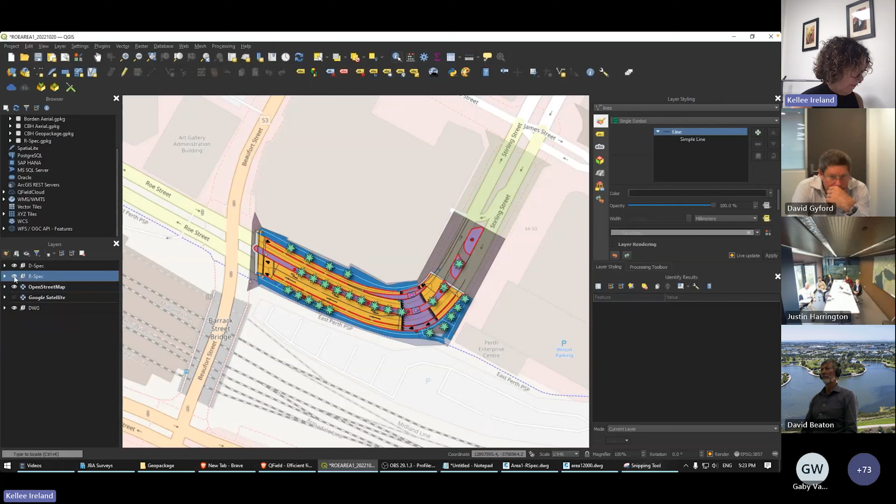So for example, in kerbs, we'll see these. I'll just turn off everything else. We've imported, so we've got the kerbs here. Some are lines because there's just one segment, and some are polylines because they have multiple segments. Both just lines in GIS, so that's okay.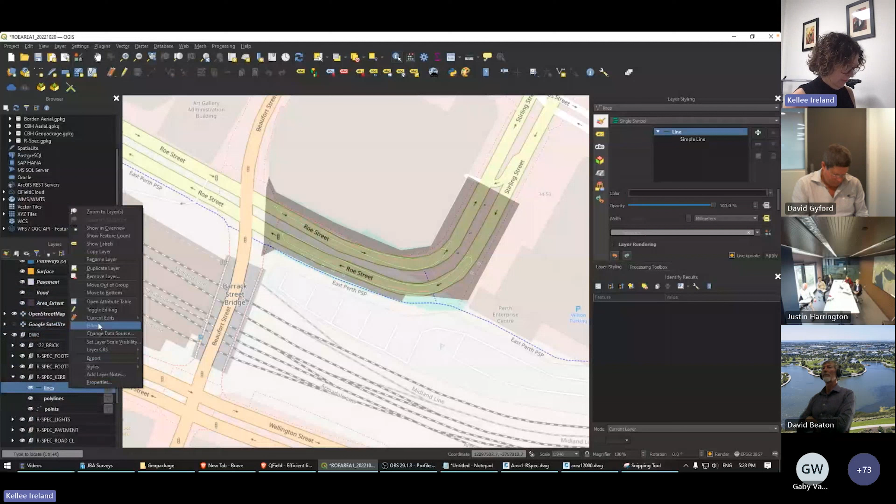What I would do then is if I wanted to bring them onto my R-Spec layer, say kerbs, make the layer editable, make these layers editable as well. Just do a nice big selection box, should hopefully get everything I need. Just the line work. These points are attached as well because just from our survey work there's points on the ends of them. Not required for this though.

So it's good that it categorizes these quite nicely. Just grab the kerbs. What have we got here? Can make it editable, apparently. Paste - so 46 features were pasted in there.

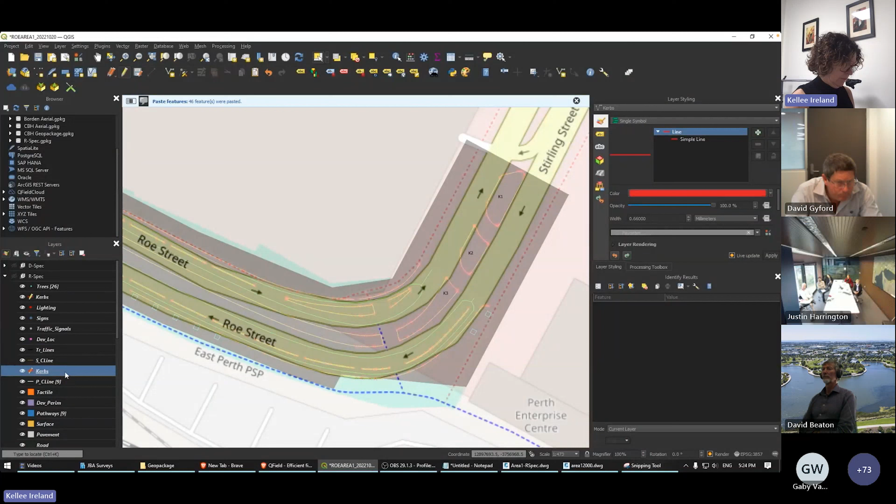When we paste in these, you'll see lots of my defaults come through. So these are the ones that I just pasted, the correct ones are above. I'm obviously not going to save this file.

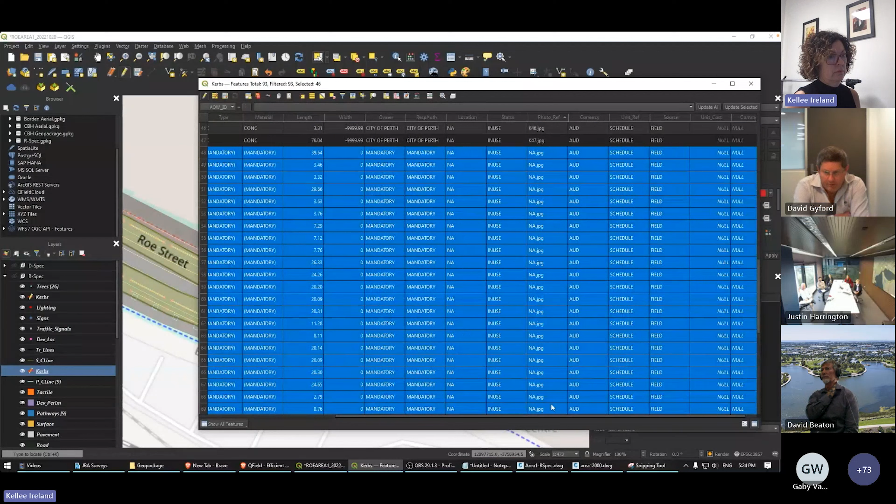So defaults on this one are length, for example. It's reading the length of these lines for me automatically and filling them out. And I've put mandatory in these ones, which we must fill out as the surveyor to help people out. And anything that can be filled out automatically or has a good default that makes sense - for example, this is reading the job file name and a few other things.

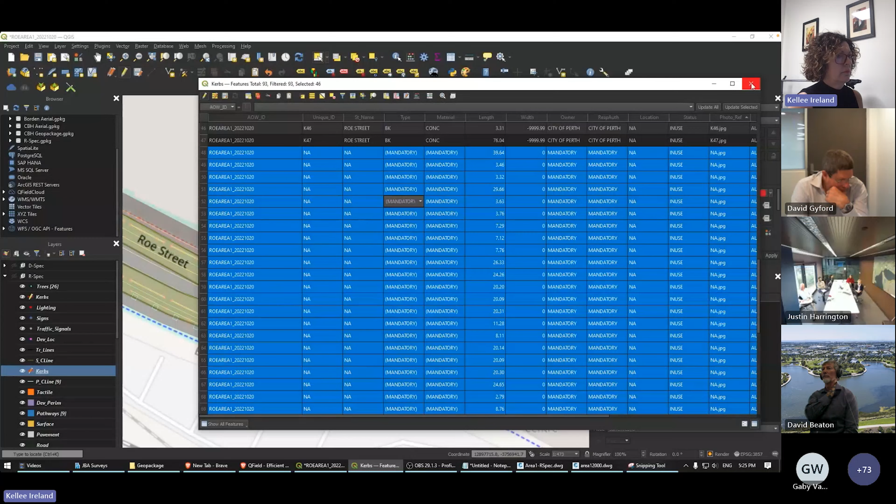That'll be filled out here, and then hopefully there's not as much data entry required. You can also do multiples at a time with this and fill out all of these if that was the case. So once we've done that, we do this for each layer. It's gonna not save this. And that would be our R-Spec job.

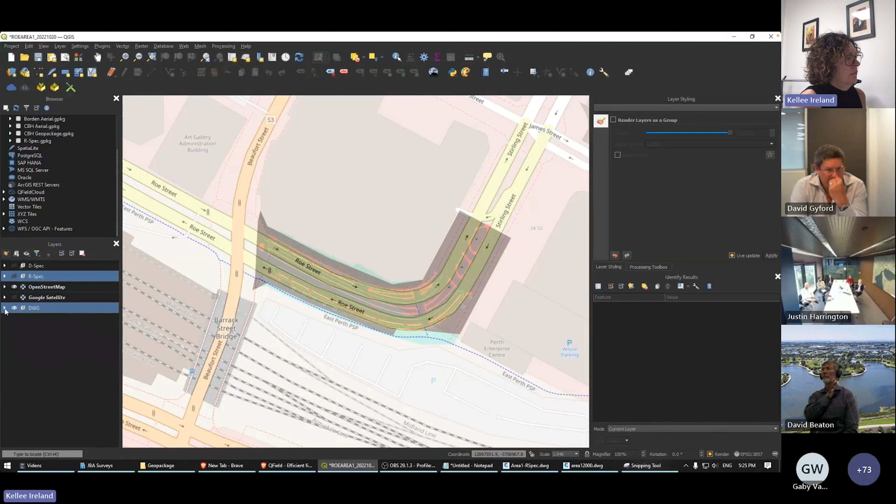Now there's quite a lot of data entry going on here, which I don't like, and also room for error just bringing this from the drawing file, etc., and a few other things. But what I believe in future we can do will be use this QField. We can have this on our phone and have those GeoPackage template layers I showed before on the surveyor's phone or tablet.

And then out in the field, they'll be able to edit and add geometry - point, line, and polygons - and connect their GNSS receivers to this and do it in real time. So my goal then would be the surveyor would have the templates, know what they're filling out, fill out as much as they can in the field. They'll also be able to attach a photo to it, as long as their phone or tablet has that capability.

And when it comes into here, it'll come straight back into QGIS. QField is linked to it, so it can come straight back in. It can also be on the cloud as well, so they can do it in the field and the person in the office can see it in real time.

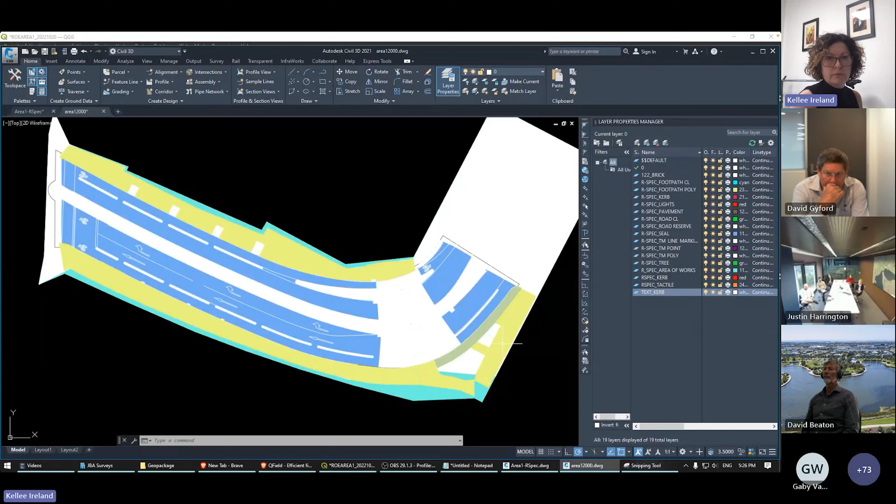It's just going to skip the steps of them having to make these shapes, make sure they're correct. They can do it out in the field where they can see everything a lot easier. And it'll have the data attached to it already, skipping this step of me bringing in the drawing file and copying and pasting it onto a layer with some fields. It'll also have the benefit of them having filled out a lot of it while they're out there. It's a lot easier, so I'm hoping in future that'll save a lot of time and end us up with something like this.

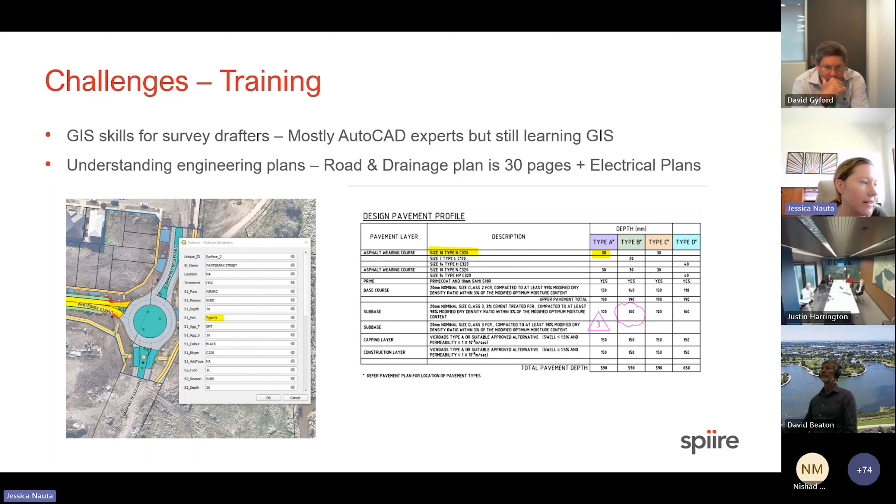Then there's also the challenge of how do we create this? We've had a couple of different goes over the years at different methods. Previously, we were producing it fully in AutoCAD Civil 3D using object data, but we found that had few limitations, was too slow. And to automate it, we were having to do manual programming, which was something our business wants to move away from, too difficult to update and maintain. So yeah, we've tried to chuck all that out.

We've also found the challenge of R-Spec involves different steps which are suited to different programs. So your drawing, drawing your shapes, that's really suited to CAD, whereas attributing things, well there's a bit of QGIS and a bit of CAD. Then adjusting things to where they're actually built, QGIS is okay for that, but once you're editing complex polygons, stuff like that, I find it much easier to use CAD. There might be really good GIS people out there who get really good at doing that in GIS, but I've just found the tools aren't quite as good.

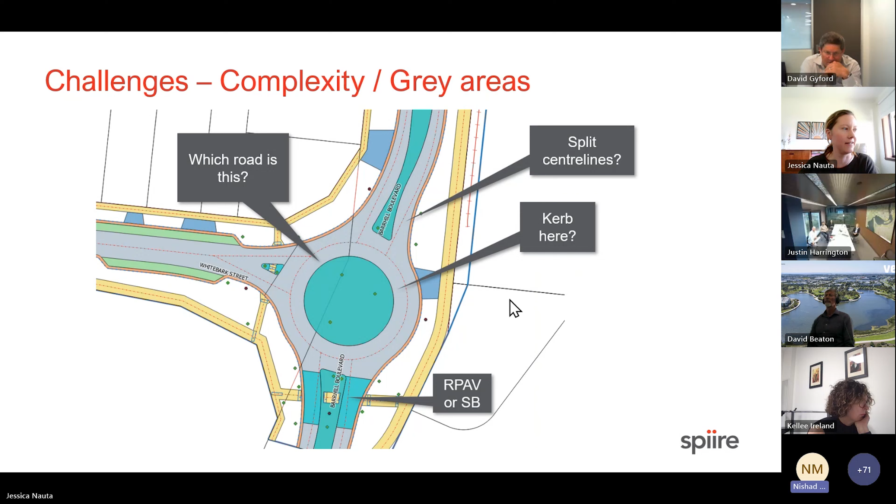Because this is kind of one of those examples where the major complexity of R-Spec is that things are built in real life that don't necessarily match up with specifications. Here we've got a road sign that has 3 separate signs on it, so 4 separate signs, a couple of poles. It's the road reserve that's there at the moment. It's actually called Bint's Road. That will be closed, and then a new road is being created through there. It's quite challenging to know what we should put on that, how to attribute that thing.

But yeah, nevertheless, I ended up showing this as 2 separate signs because that's how it was shown on the engineering plans. Whether or not that's right or wrong, you're not really sure. But yeah, you're just making these choices along the way.

And that was sort of the main parts I had in my presentation about the complexities of R-Spec. It's really difficult to always match up specifications with what's there in real life. And there's the challenge of getting surveyors to understand GIS when they're really not GIS people from a GIS background. That's our major challenge. So thanks, everyone.

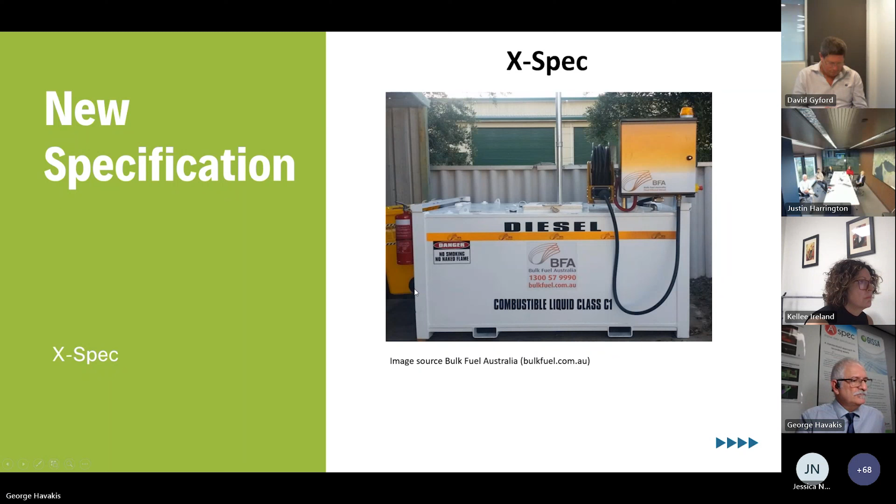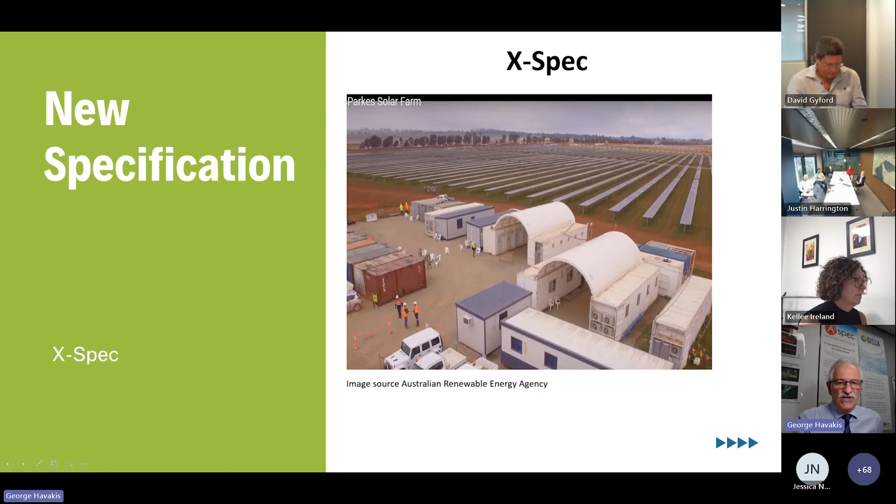Similarly, solar farms - this one gives you an example of Parkes Solar Farm. Again, you've got buildings, you've got car parks, which are covered by the specs. What we don't have is solar farms. We have on the drawing board that we will develop an energy spec. If that is the case, then solar farms will fit into that particular spec. So they're the 3 examples we're looking at currently.

Stephen Elliott, I think I fixed up the email - thank you for sending it through. Stephen's from Bass Coast Shire, and he identified that we had an incorrect email for his organisation at Bass Coast. The intention of this is to provide a dedicated email address where A-SPEC queries can be made direct to the asset owner. We're requesting that asset owners provide us an email address that is not a generic info@ address, but one that will land with the asset owners or the people dealing with the asset data. That way, if consultants or contractors have particular inquiries, they can go directly to them.

This is an ongoing task for us, and eventually this will be made available on the A-SPEC website. We will put it on the website shortly, but more importantly it's on the right-hand side, so you can see which specifications the organisation subscribes to, because that to me is the most critical thing. We're getting inquiries on a weekly basis about what specifications a particular council or authority has, and we want to save you having to contact us to get that query answered. So that will be on next week.

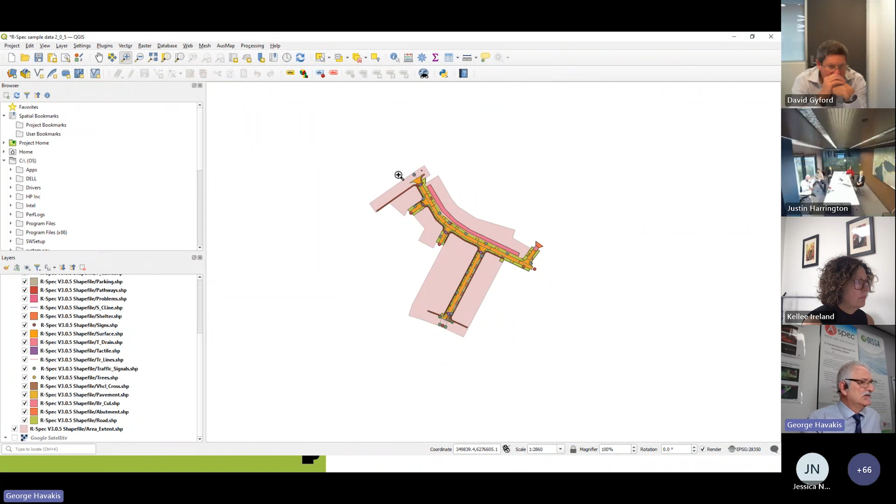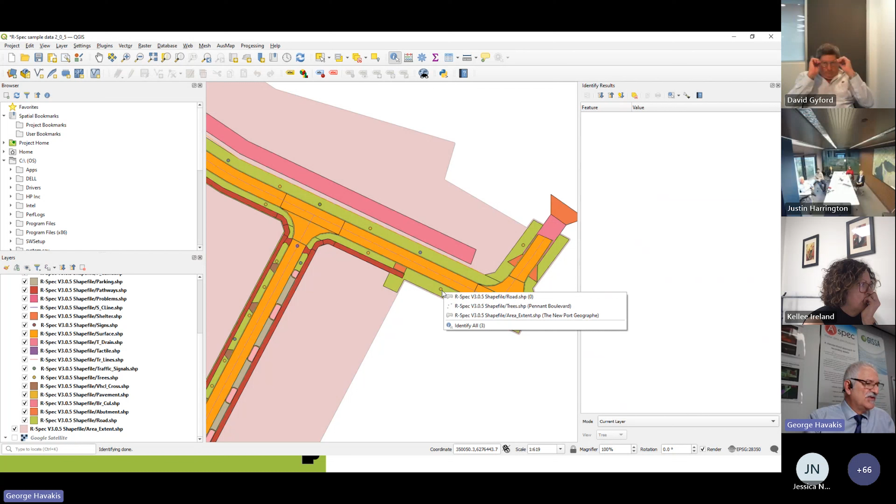I've just opened up QGIS here. This is a particular area we've got. Now, when I show all of these layers, the sample data is essentially going to be made up of real data and associated attributes. So if you're looking to start setting up your own environments, the sample data will have all of the attributes in there, it will have values, it will have appropriate default values, etc. Irrespective of what particular asset type it is, you will find it in the sample data with the correct structure.

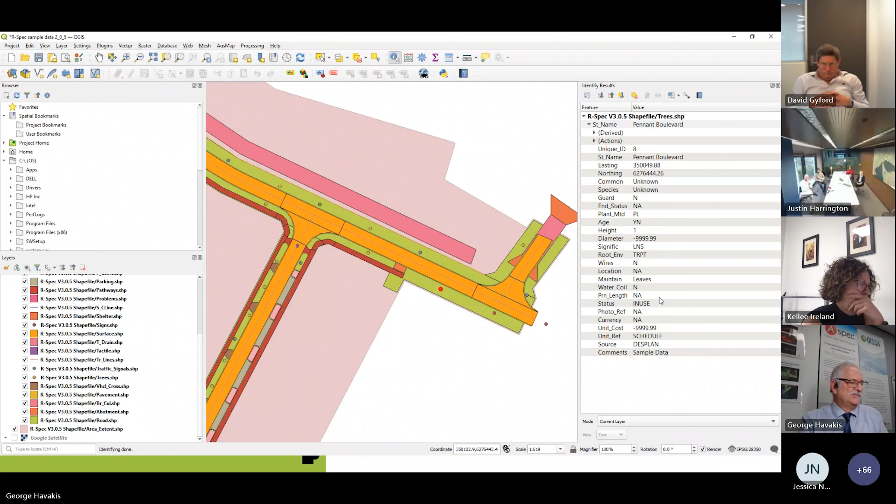I'll just put a caveat on it - we are human and errors do occur, and it was identified last week that we had created an error. So don't hesitate to let us know, we're not precious about that. The whole intention is that we have this data available for you to use, and that will be for every data set.

Our next forum is next week. We're in the last 3 weeks, and we have two of our colleagues, Kellee and Gabby, who are going on holidays. So this is their farewell appearance, because they won't be back for the last 3 events. They've got an excellent MC lined up for the next 3 events - me. I know it's a bit funny, but we can't be too serious about these things.

So I'll endeavour to be as jovial and witty as Kellee, and I won't be doing technical presentations. Gabby is looking at how we can probably provide some technical presentations through videoing them, and that way we can maintain our tech talk.

Now, there have been a few questions about access to videos. I've received a couple of emails today asking if the video will be available if they can't make it. Yes, it will be available. The B and D spec videos have just been finalised, so you'll probably be receiving a message shortly, which will go out to everybody registered for the different forums and also to our broader database, giving you a link to the A-SPEC YouTube channel. You can then look at not just this year's videos, but the last couple of years' videos as well, and recap on some of the questions that were asked and how they were answered, and whether we answered them well or not.